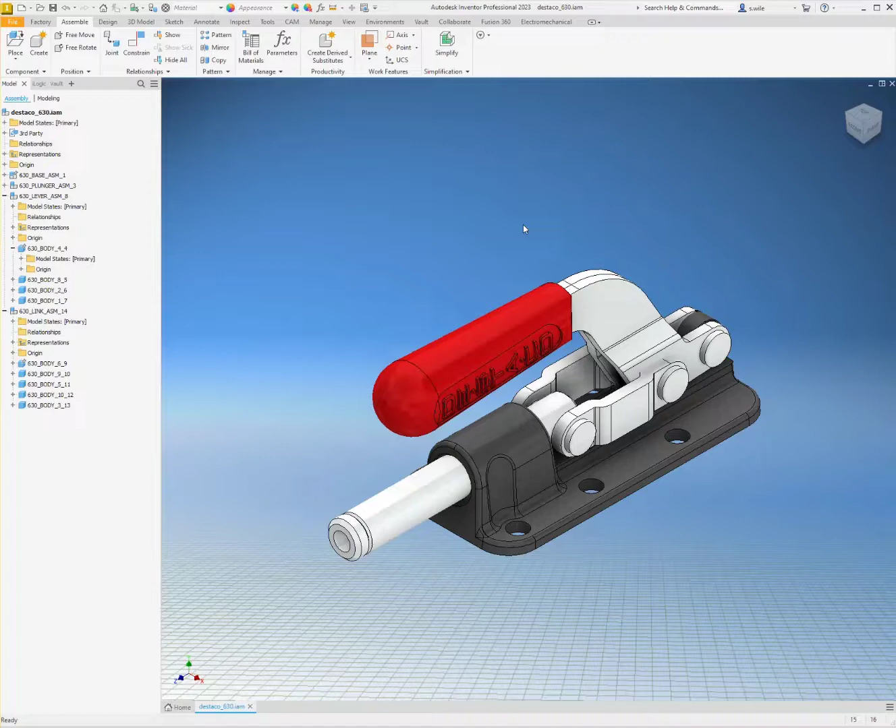So in the last video we made all of these parts, and I see now that I missed a few fillets. I think I missed this fillet running around the outside. This is the downloaded file. Nothing is constrained, it's just a step file, and I broke this apart so we could make all of the pieces. So if you've got all of them modeled, let's put this together.

So I'm going to start a new assembly, and then we'll just play around in the assembly environment a bit. Start by bringing in the base. Here we go. There's our base, and I'm going to place it grounded at origin. So right click, ground at origin. Your first part you always want to ground, and the first part should be something that's going to be fairly stable.

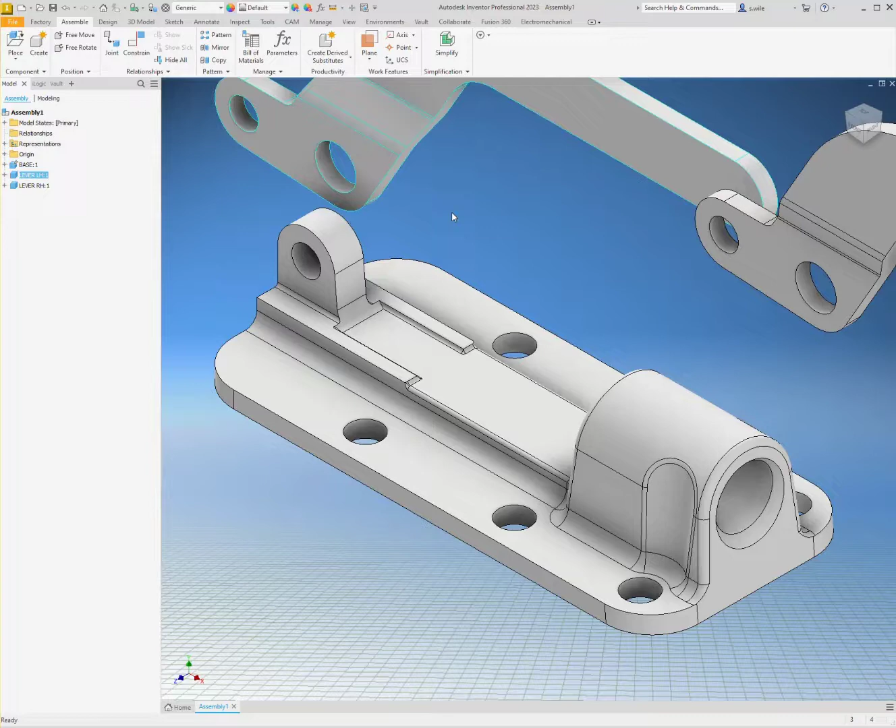So then let's go back and get the two levers and put them in position. So these will just be insert constraints. I'm going to do this all with constraints. Probably wouldn't be a bad design to do over and do with joints. All right, so they move independent of each other. So maybe a flush across the top. I think I'm going to leave that for now.

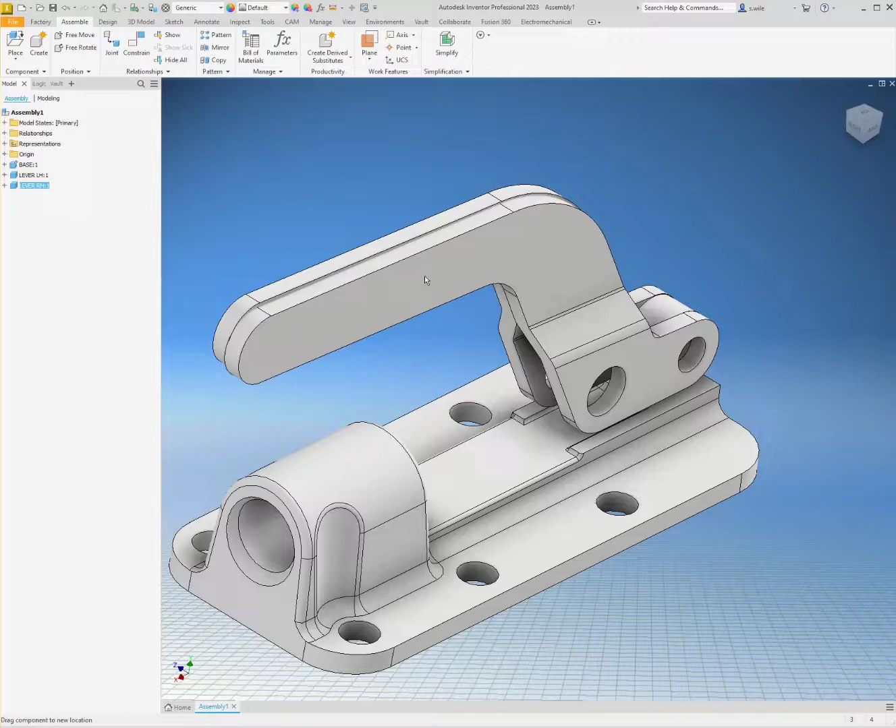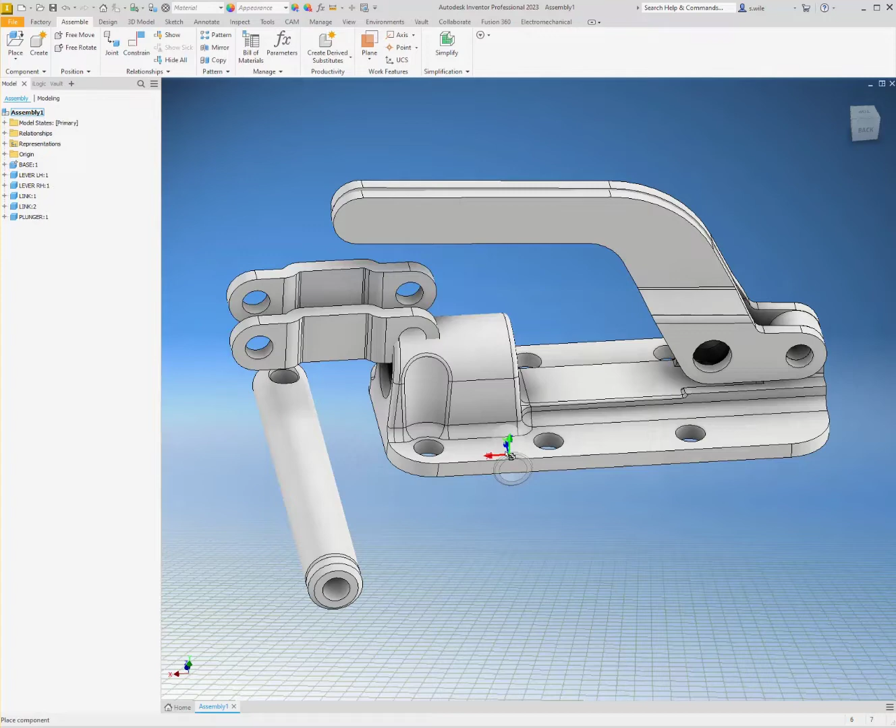And then we'll bring the links in. So we need two links and a plunger. And we'll just get this thing working. So I'll do an insert off of here to here. Oh, the bushing needs to go in there. So let's get that first. Yeah, we'll put that in first. That looks right.

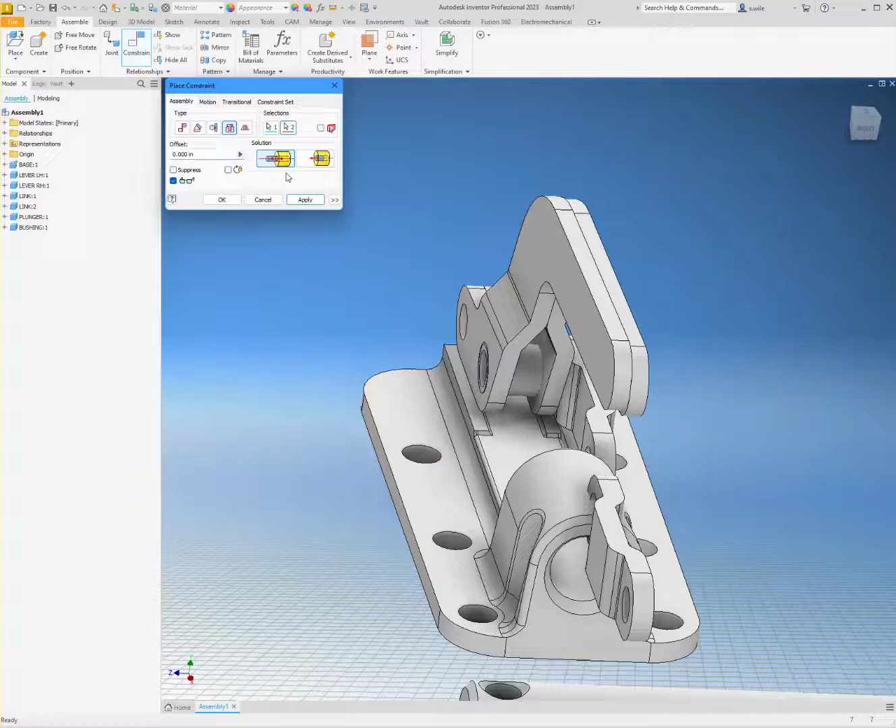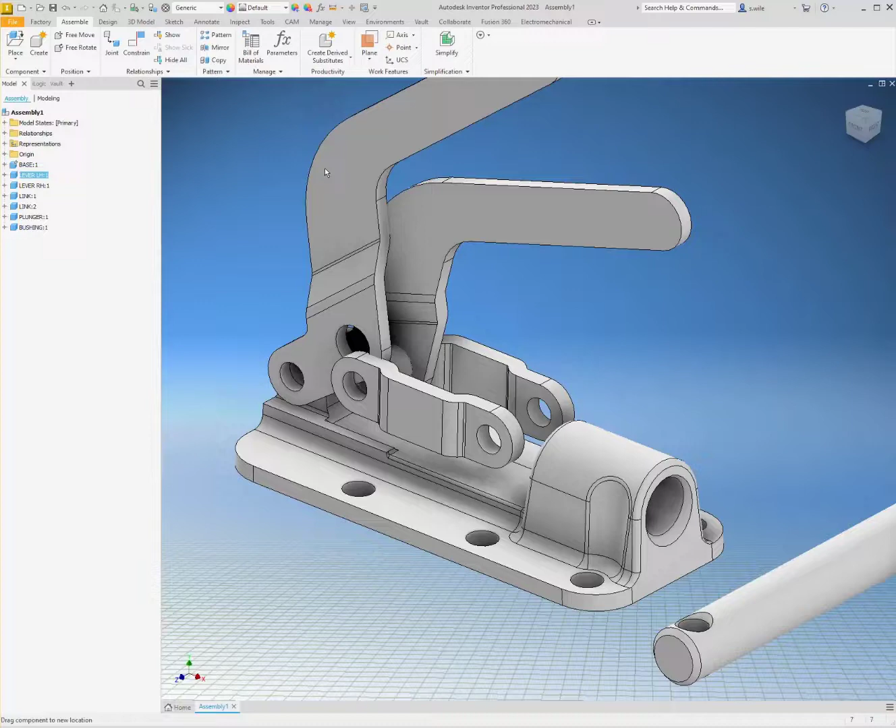And then we'll put a link on there and a link over there. All right, and I like to every now and then jump out, kind of test it. Oh, that's constrained to that bushing, so we'll just constrain this the way it would be assembled for real. Like that bushing would hold the two together.

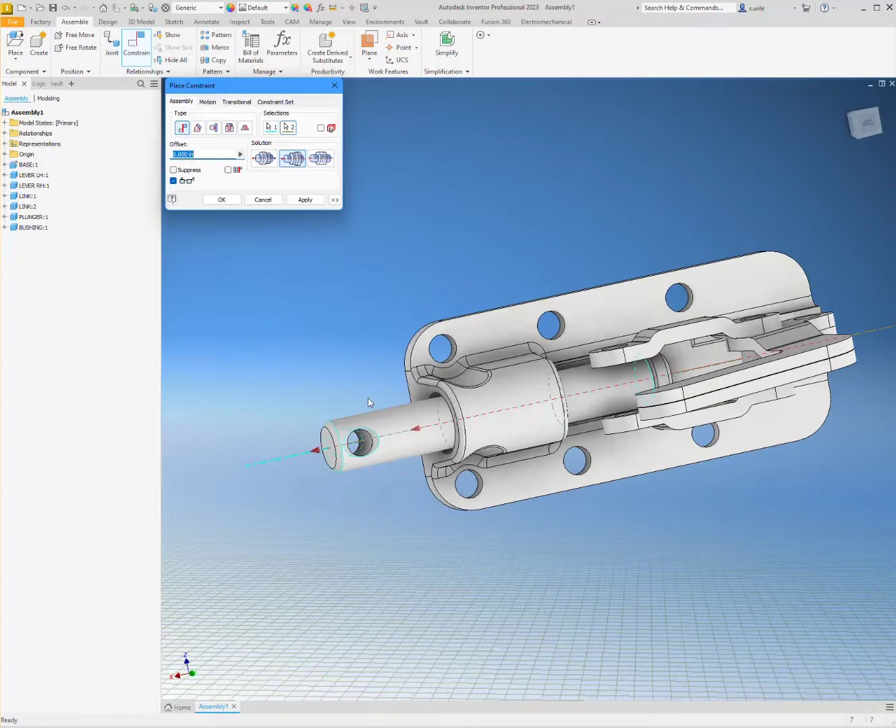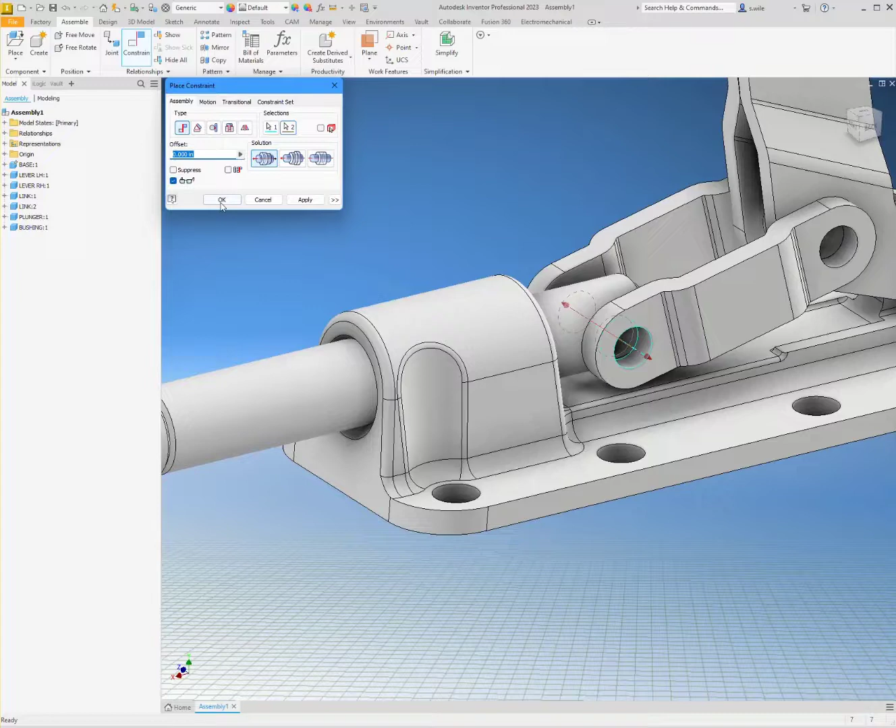The plunger, I'll do a mate, axis to axis, and that's going the wrong way. And then we'll constrain one more axis to axis. Okay, let's test it. Okay, so we'll get the last link. All right, we need our rivets yet. And I'm just now seeing that there's different sizes of rivets, and I didn't have us draw different sizes. So we might have to make a new rivet.

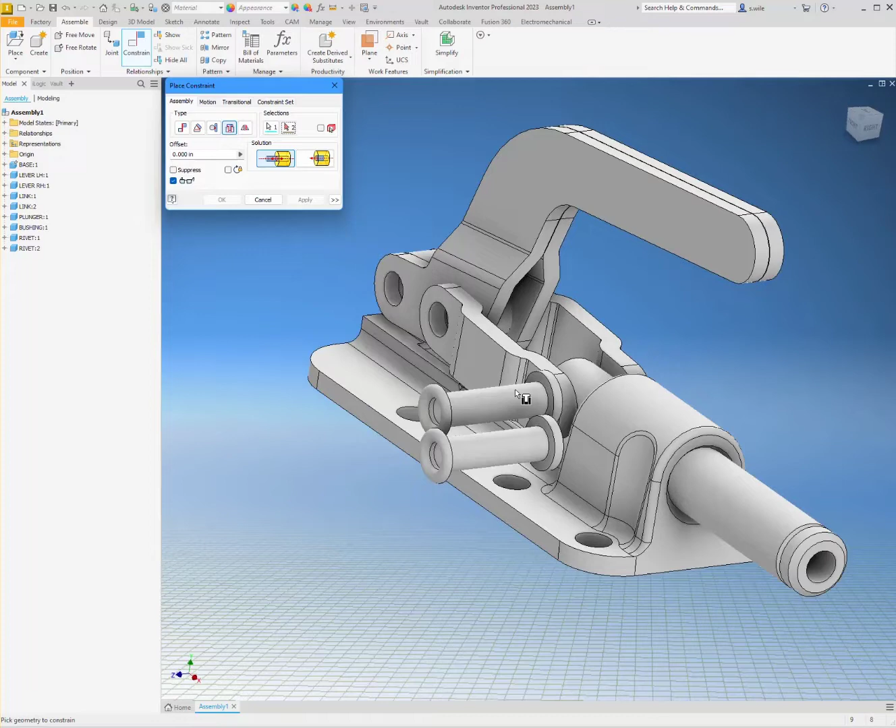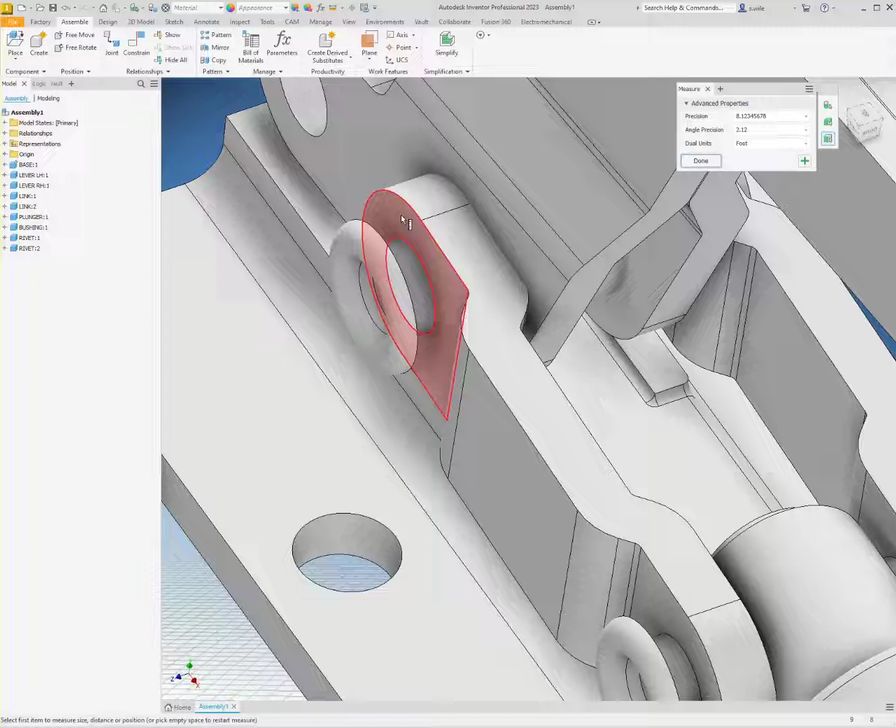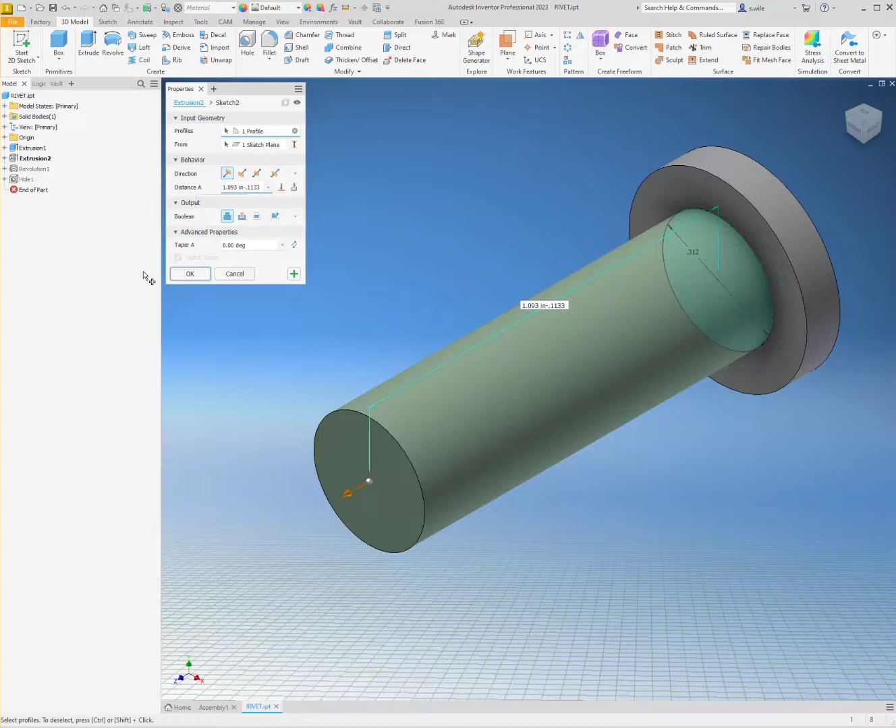Yeah, these are too big. So I'm going to measure this. We're going to fix this right now. So that is 0.1133. We want to take off 0.1133. I'm going to open this, change this extrusion minus 0.1133. Right? So those rivets look okay, but now if I copy and paste this one is not going to be right again because this is a different width and I don't have a second rivet.

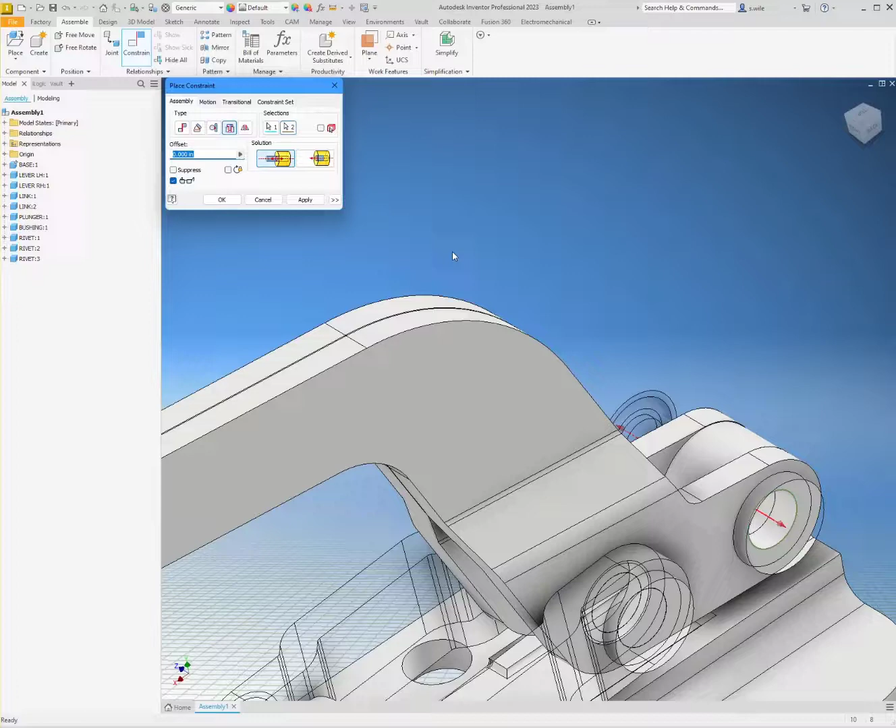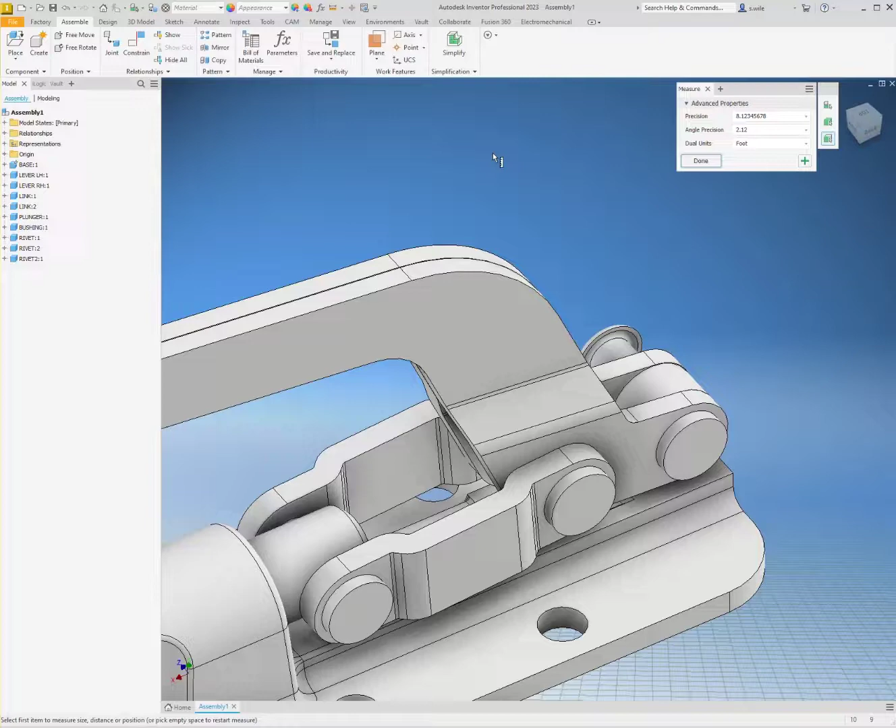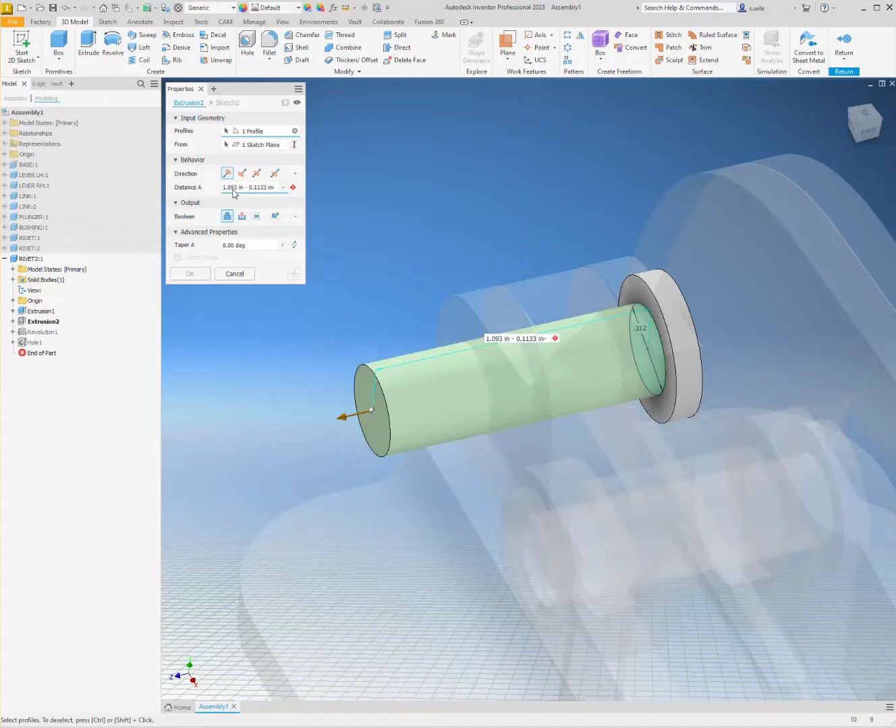So I'm going to select this part and say save and replace right here. So that's going to save it as a new name and then do a replace component. This would be rivet 2. And let's see how much we need to take off of it. Point 3557. So we're going to subtract an additional 0.3557. Okay, so we've got our 3 rivets. And let's save this, and our new rivet.

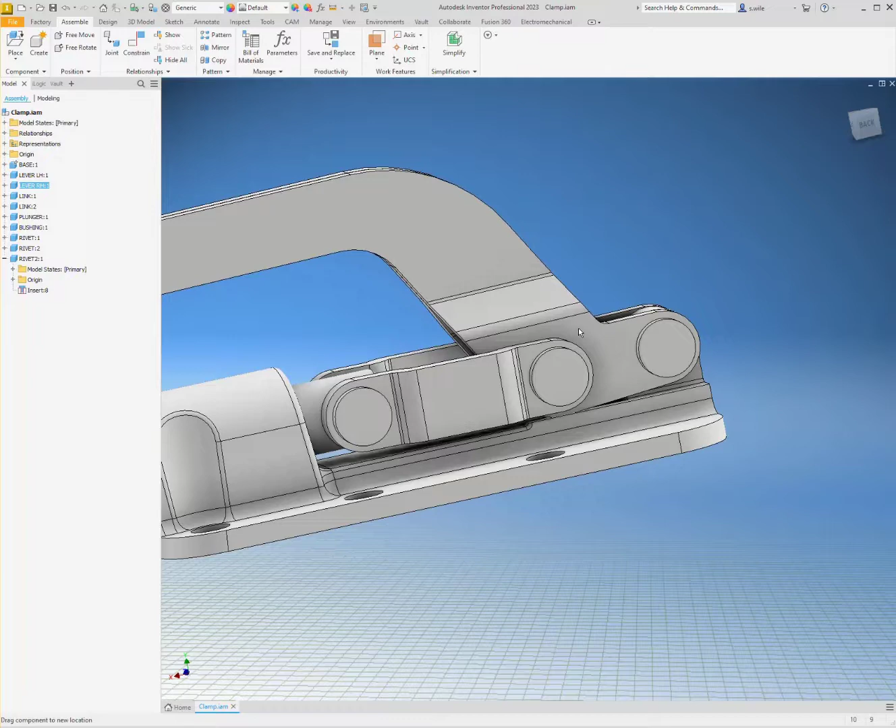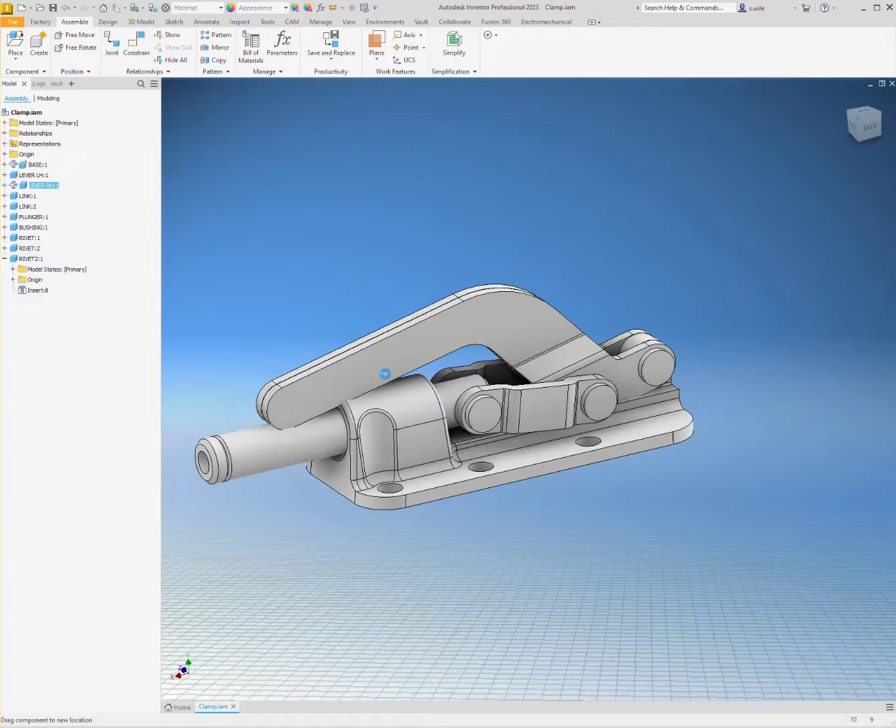So what can we do with this thing? Right now it kind of just goes through itself, and in reality it would hit here somewhere, and then when it goes over center it would hit there. So to find out what that range of motion is, we can say this piece and this piece. I'll shift and select those 2 pieces and say they are part of a contact set. And when they hit, I don't want them to go through each other. And on the Inspect tab, I can turn on the contact solver. And now that will stop when that arm hits. So it's stopping as soon as the arm hits and stopping as soon as the arm hits here.

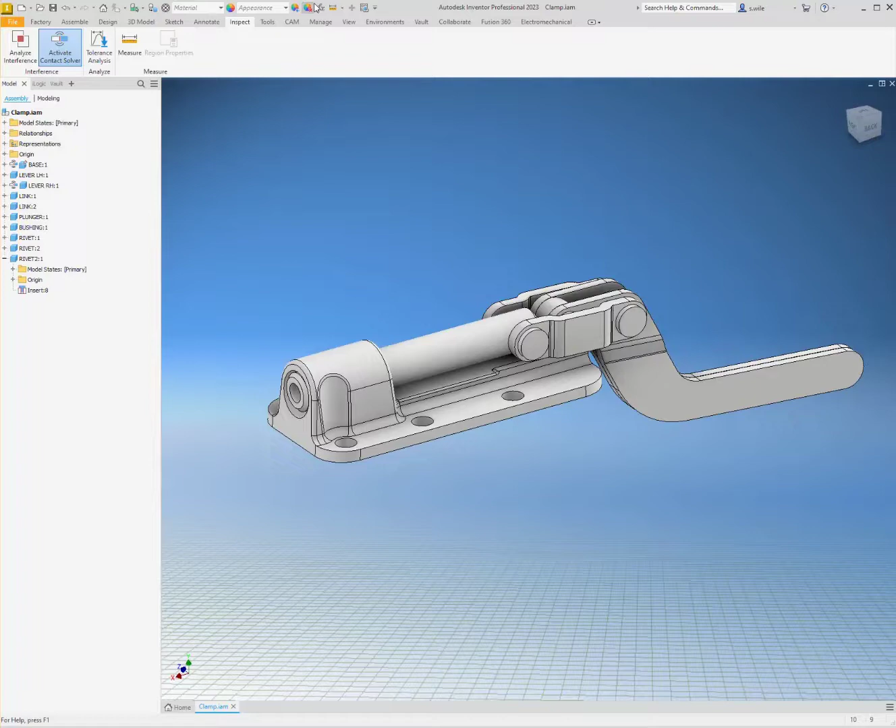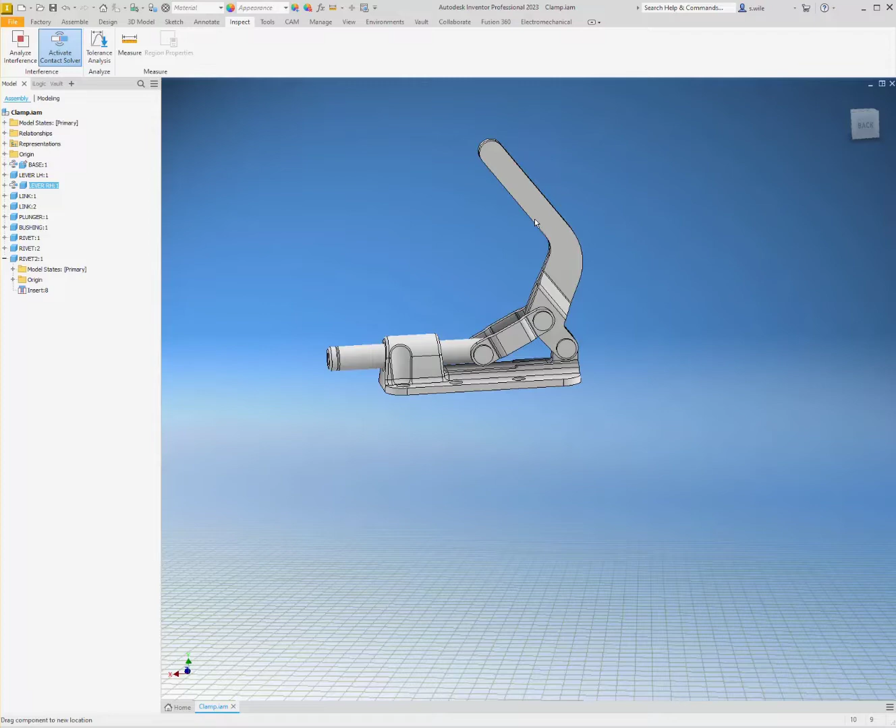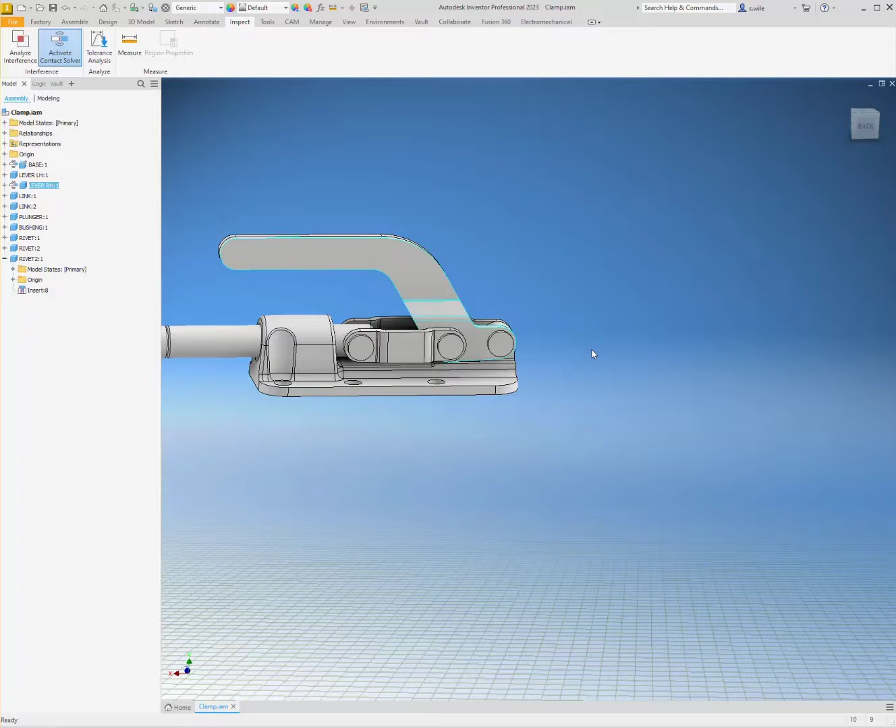Where is it actually hitting? It's hitting some, oh, you know what? It's hitting the fillet. So it's stopping as soon as it hits that fillet. So we've got our range of motion. We can measure this now. Measure from here to here. So we'll say 5 degrees, 4 degrees over 180. And if I bring this back around, when it goes over center there, we have 0.34 degrees. So just by turning on contact solver, you can very quickly find what our range of motion is. And if I turn that back off, now this will go through itself again.

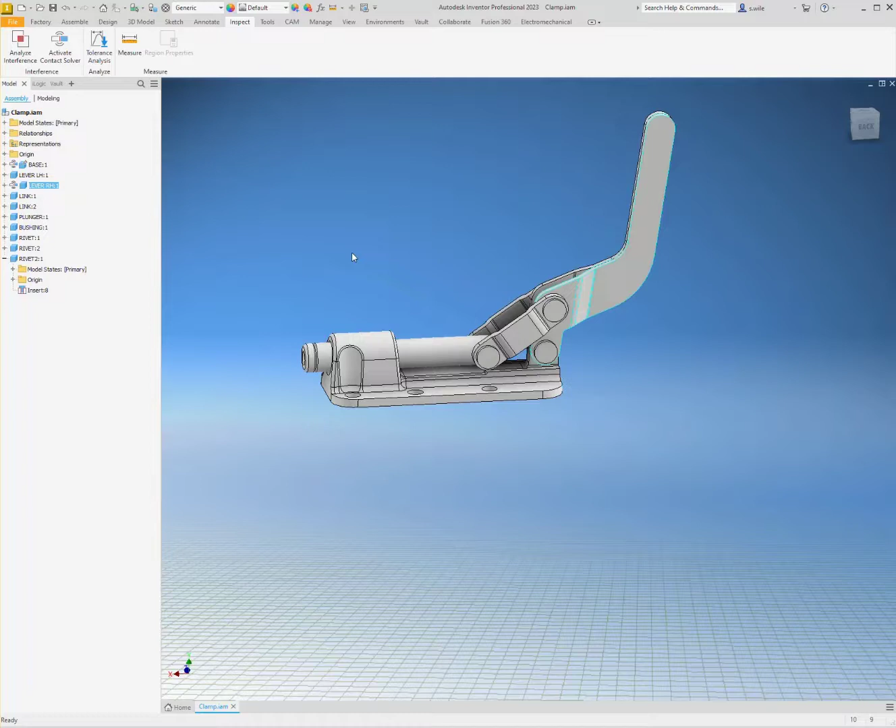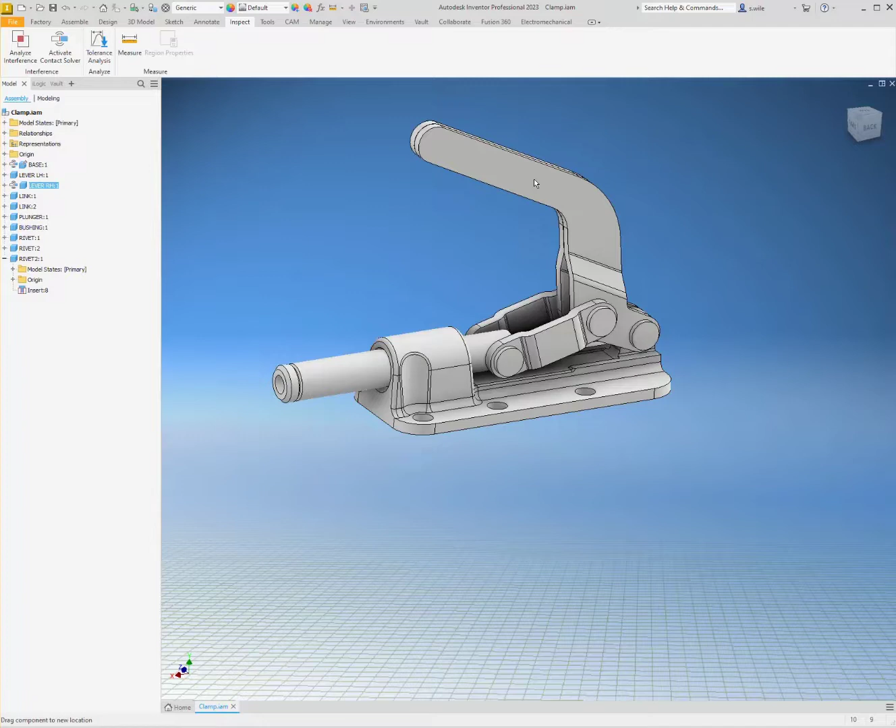But I can add my final constraint. Like this is something that would go in a library, and you can't leave stuff just flexible like this because you may want it this way and the next user may want it like this. And then your models are going to change, and then you'll open your model and change it back. It's going to change the other user's model. You also cannot have this assembly in another assembly in 2 different variations. So if on a table I want this closed and then opened, I'd have to save it as a new assembly if I didn't fully constrain this.

So I'm going to add an angle constraint. And I'll pick this as my reference vector. And I can go down 0.34.

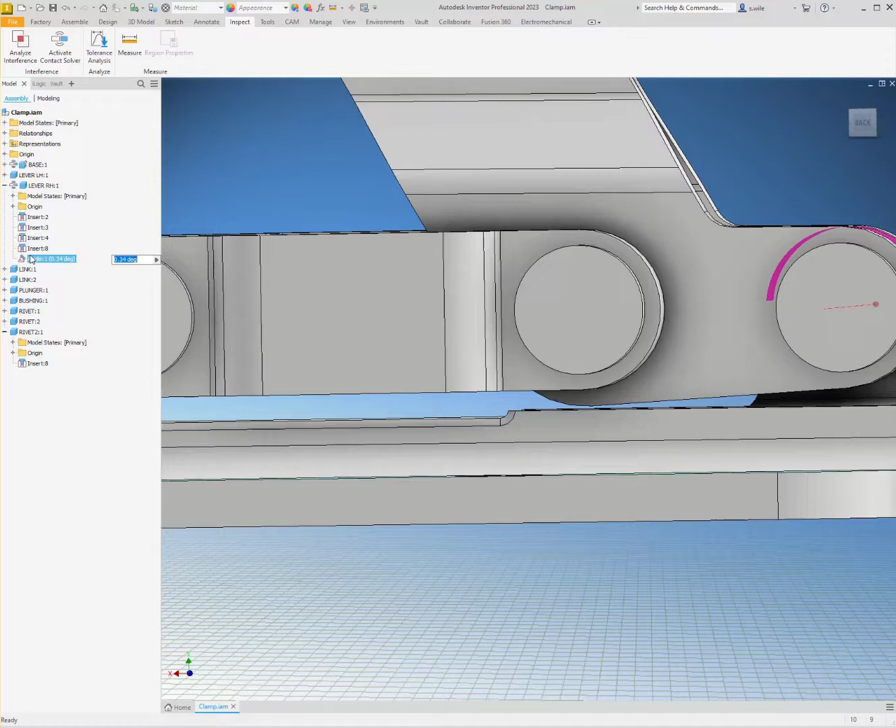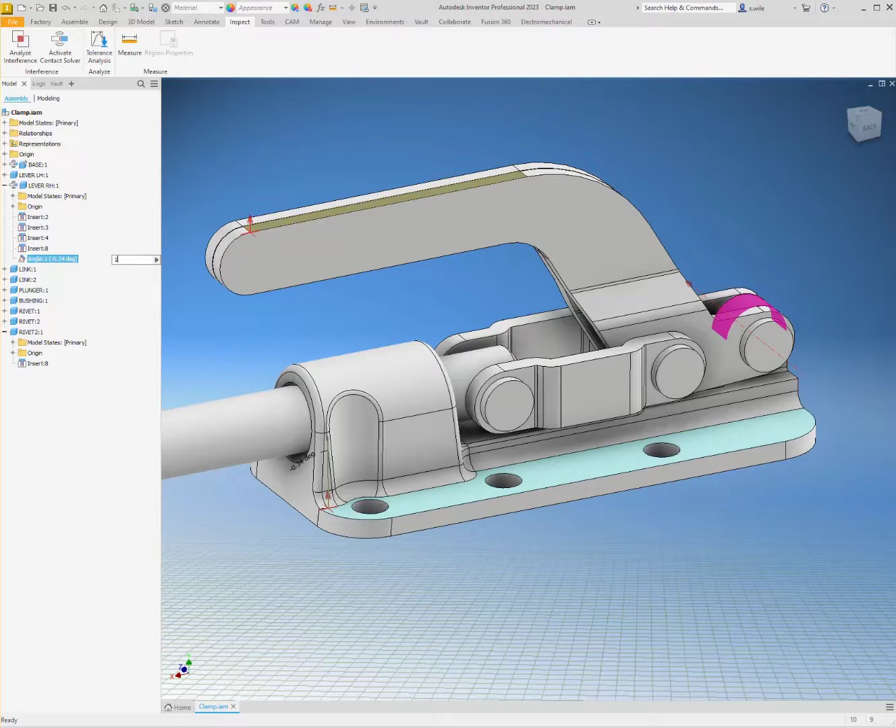Negative 0.34. There we go, negative 0.34. So now I'm just over center and it's locked in place. But then I can move this back. So let me write this down. Negative 0.34 is closed. And I can make this 184. And that's where it's hitting on the back side. So that would be fully open.

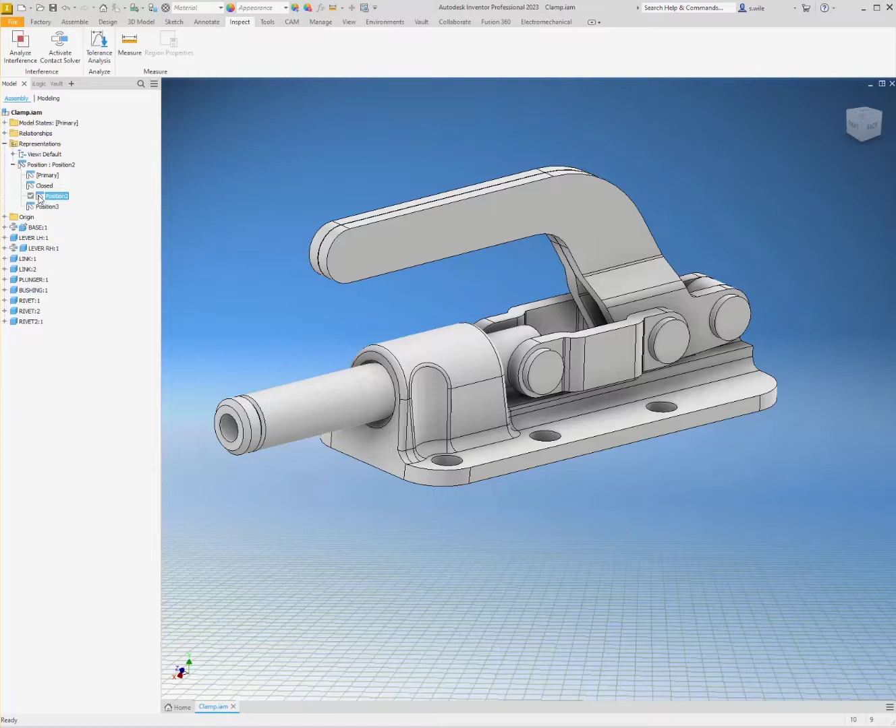So how do we make it so that we can switch this between negative 0.34 and 184 without having to edit a constraint? We do that with positional representations. So I'll make a new positional rep, make a couple new ones, and this one will be called closed. We'll call this one half, and this one open, and we'll make one more and call it free.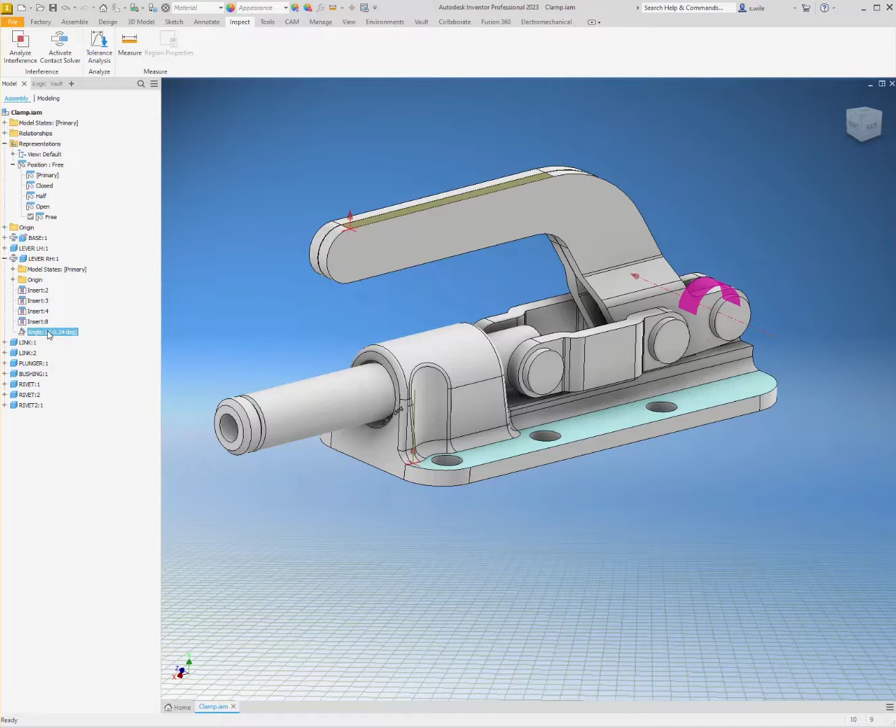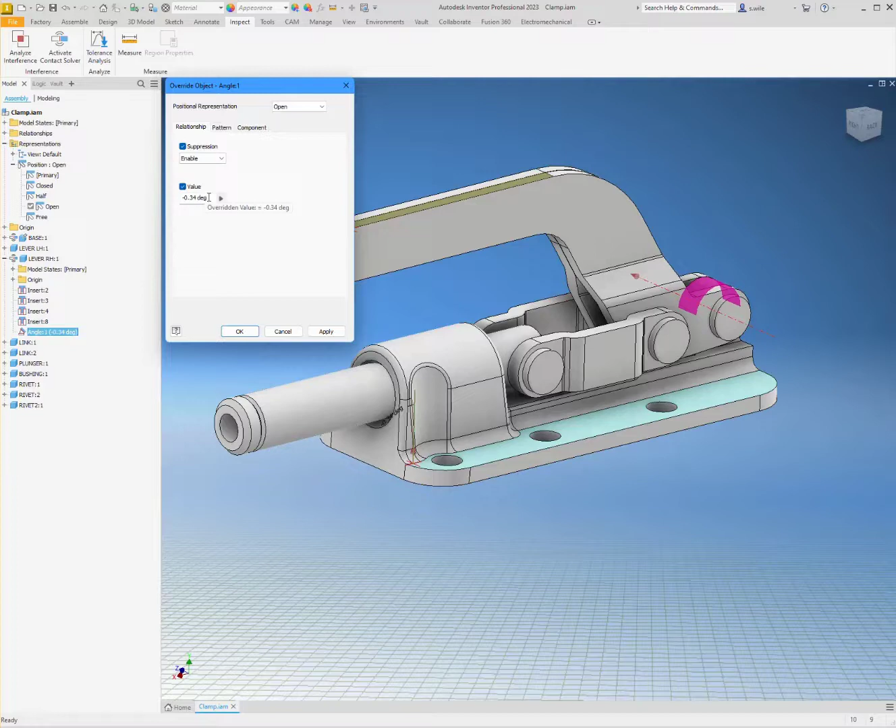So with the check mark on free, I'm in that positional rep. I'm going to do an override on the angle constraint and say it is suppressed. So as long as it's in free, this thing's free to rotate. If I go to open, I can override this. I can do it all from here as well. When I'm in open, I never want it suppressed. If someone goes in the primary and suppresses it, and I'm using open, I don't want it suppressed. So I'm going to check both of these. And this is going to be 184.

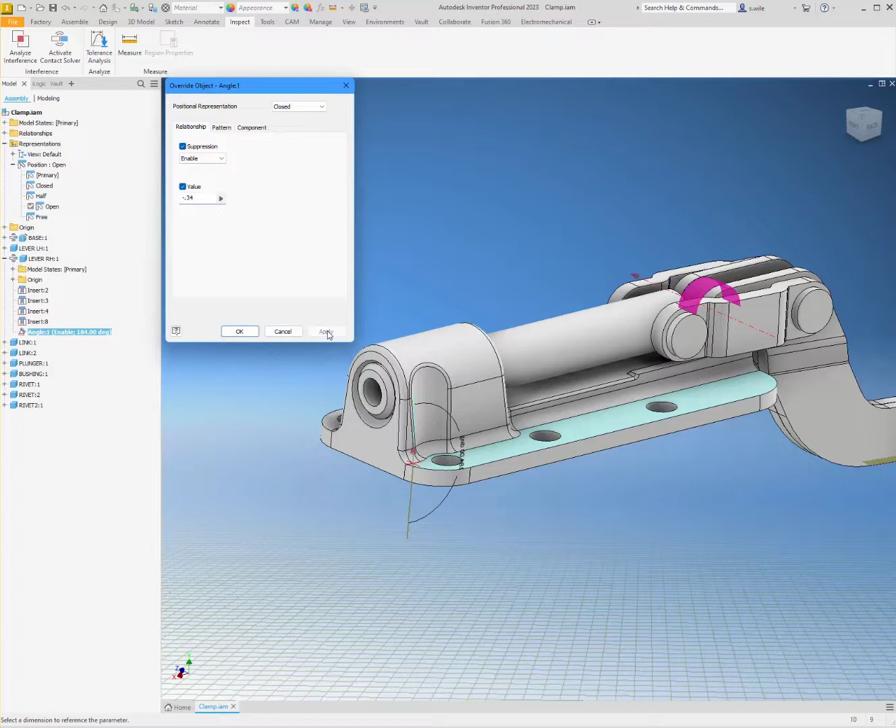And then half, oh, I was going to show when I'm overriding this, I don't have to switch. I can switch here. So I can go to half and say half is 90, apply that, and then I'll go to closed and check both of these. And this was negative 0.34 and apply that. And now I've added an override to closed, half, open, and free. All right, so let's save this and see what we can do with these.

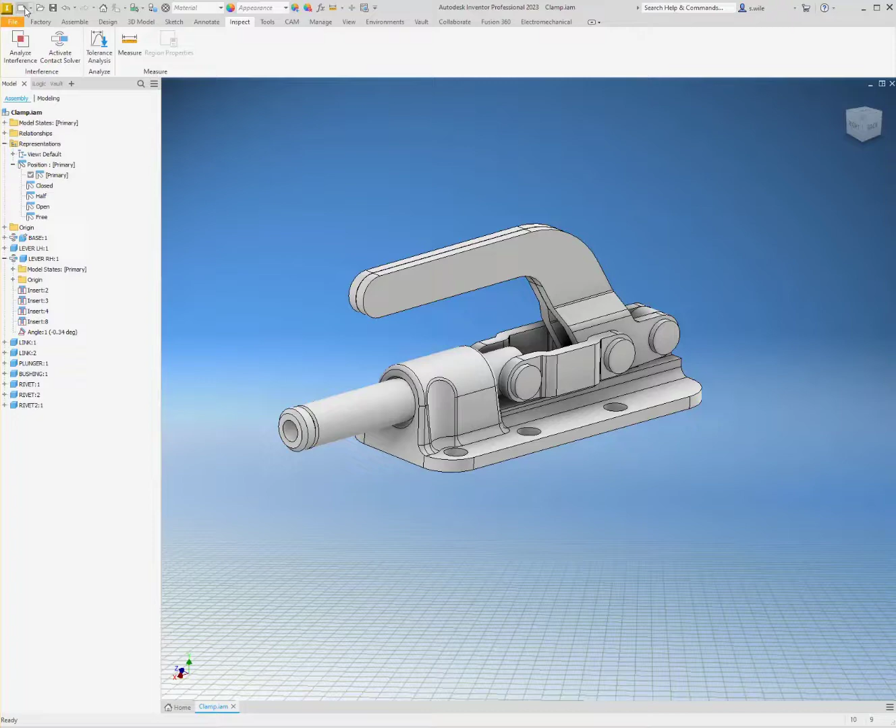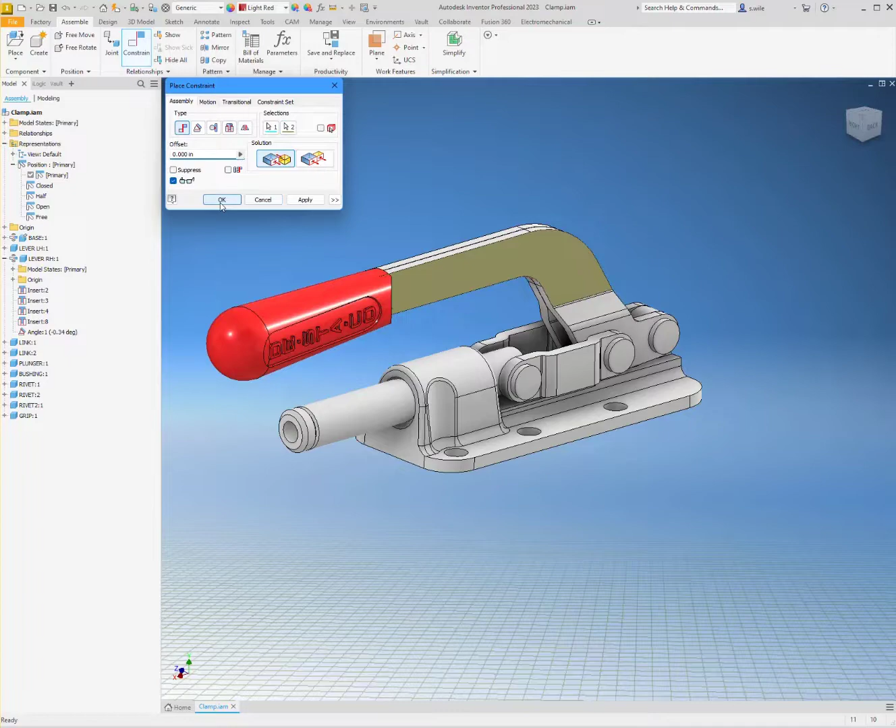Oh, you know what? I didn't add the handle or the rubber grip. The most difficult thing to place. Let's go place that. Grip. This one's difficult because it's a stretch fit. So first of all, we want it right in the center. And if I put this face on here, you can see it's not centered. I'm digging into material here, and I'm flush down here. So actually it's at an angle because that end is flared out a little bit.

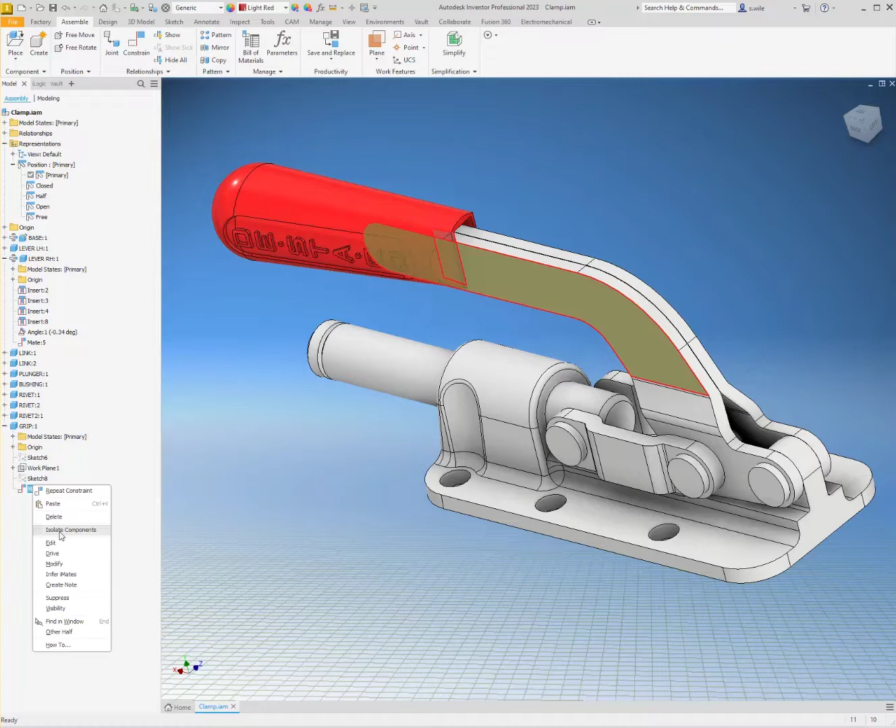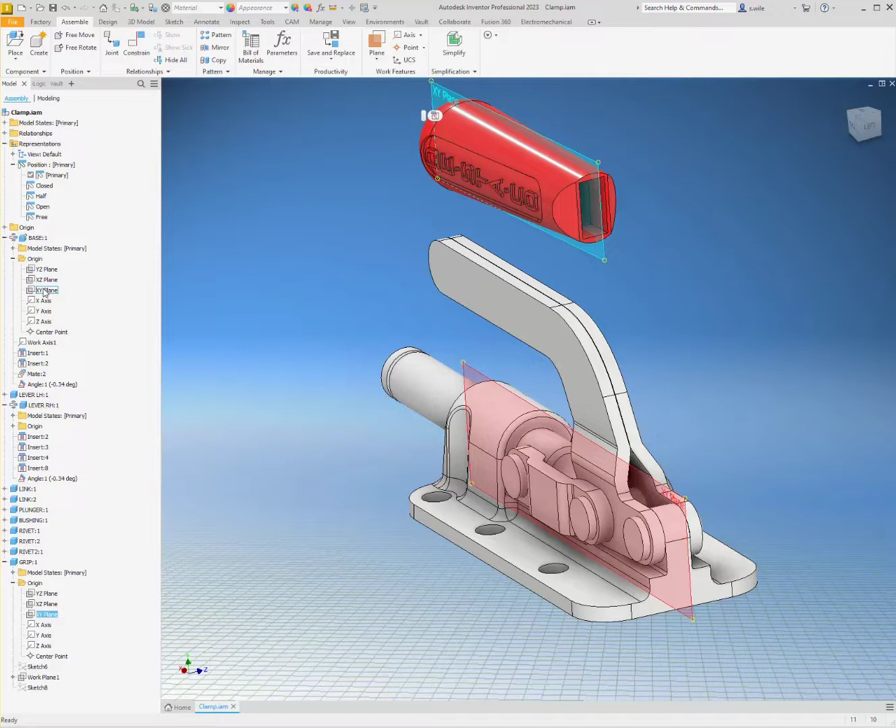So to do this right, I have to use planes. So I'm going to find the origin plane that runs down the center. This is why it's important to model around something that makes sense plane-wise. And go to my base and find a plane that's going to work there. So it's going to be XY, so I'll say constrain XY to XY and say OK. And now this should be perfectly centered, same amount of material squished around the metal piece on both sides.

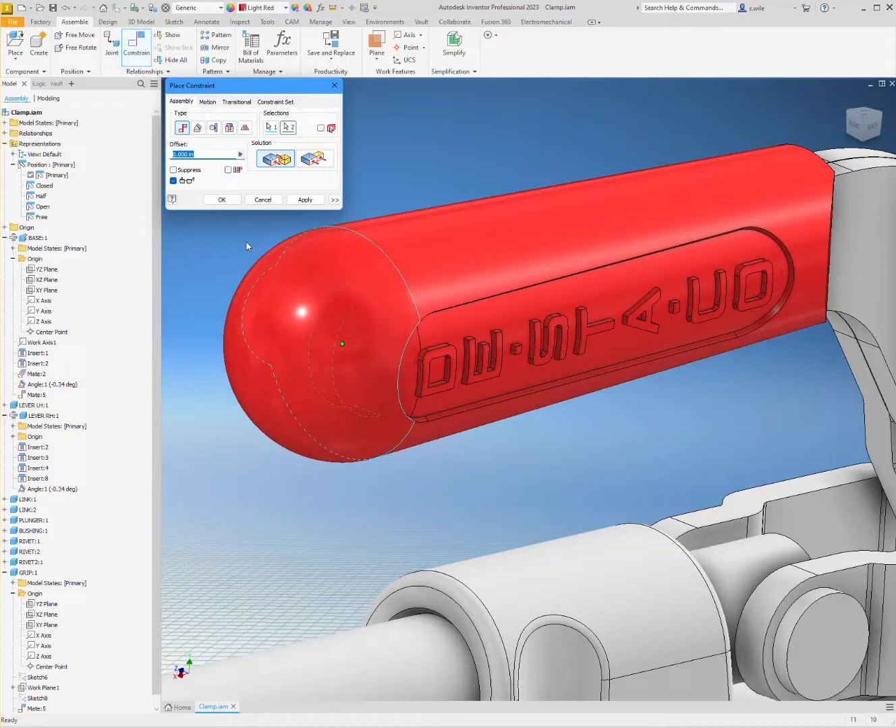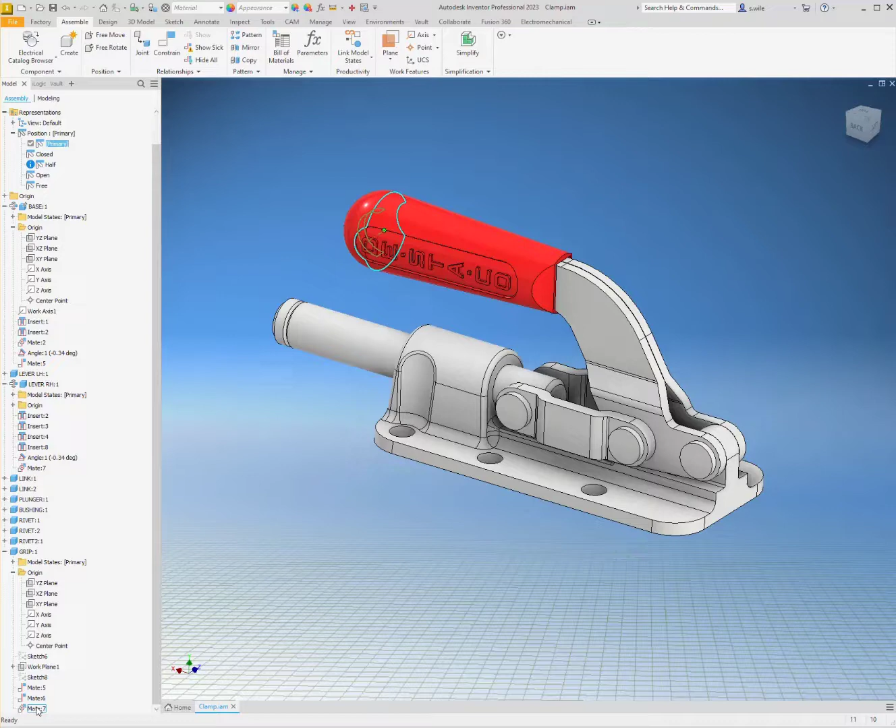Let's see if we can do a constraint from face to face with a mate there. So where are we at here? And then I don't know that we can do, can we just go on that edge and that axis? Okay. So that's fully constrained. Let's make sure that we have our planes and stuff set right when we go to half. Yeah, I thought it didn't like the last mate that I added. Let me delete this one.

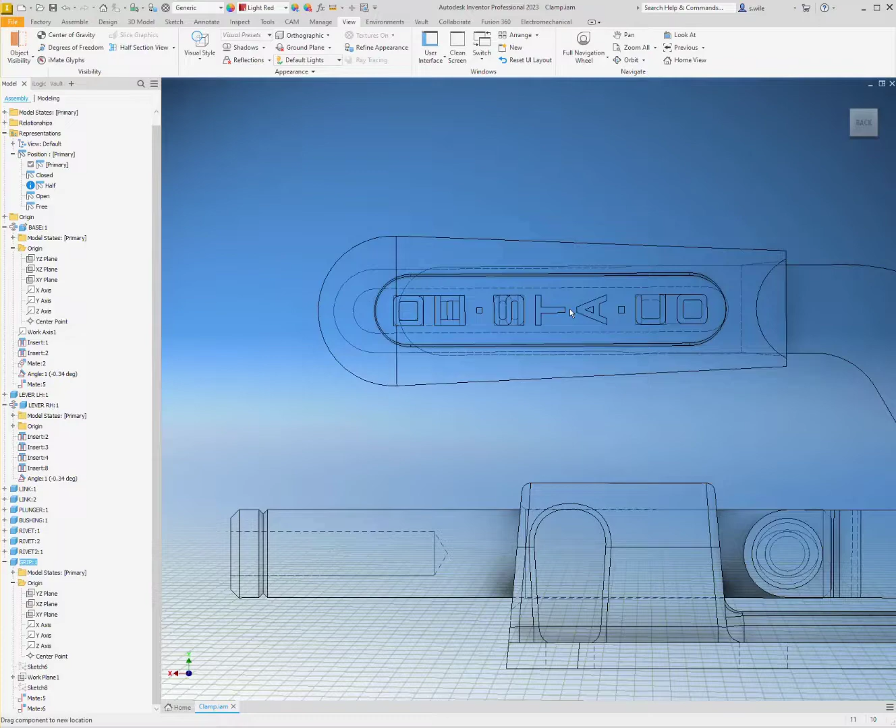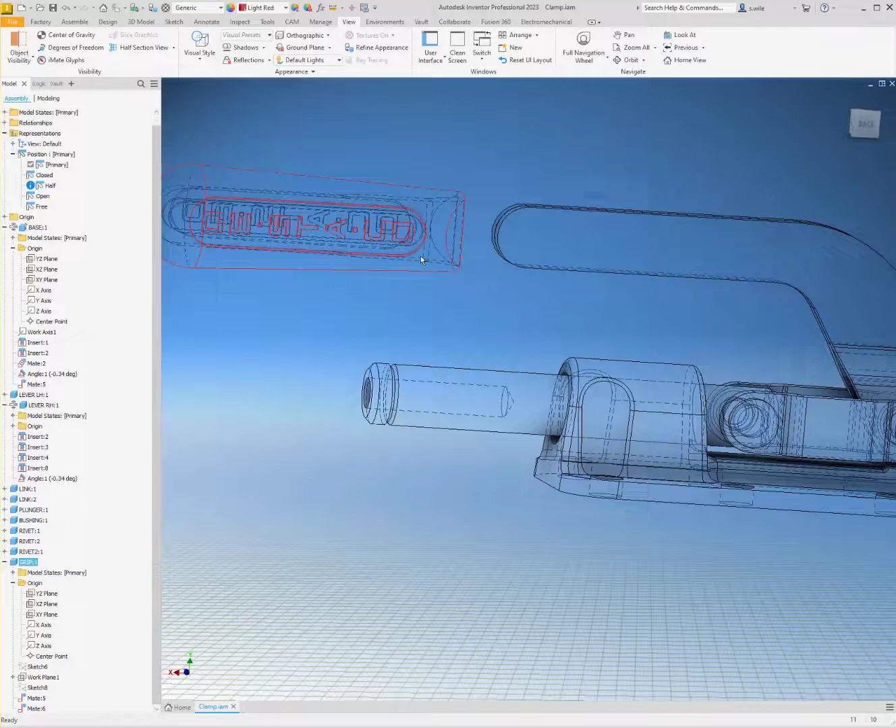Because it's a stretch fit and I said face to face, the center point of this circle is not quite in line with that axis. So to make sure that it's all the way on, I think I'm going to delete this mate. And I'm going to do a constraint center line to center line. So now it should be pushed right in against, but it can still pivot.

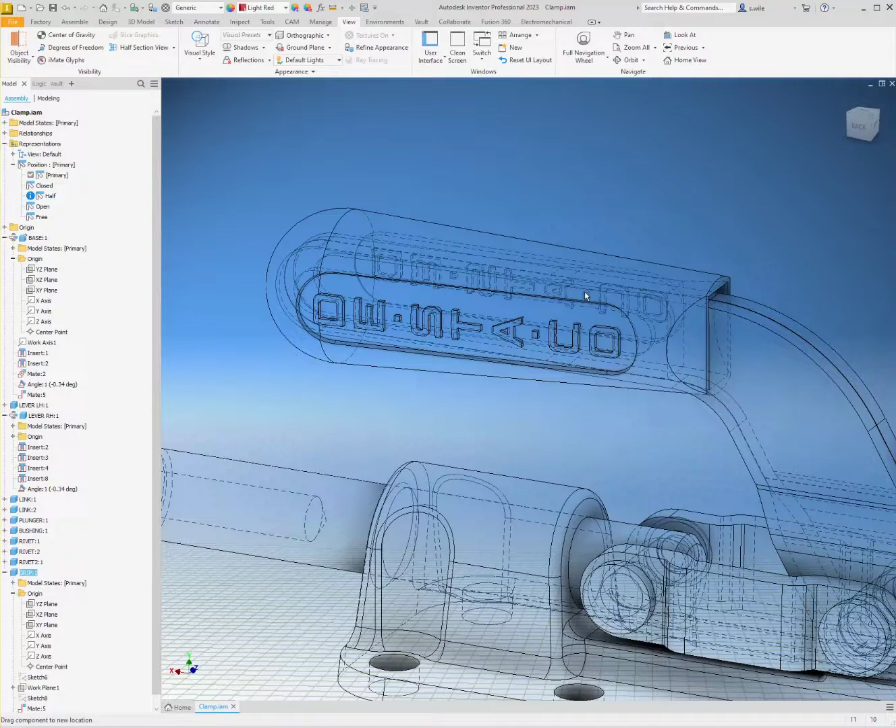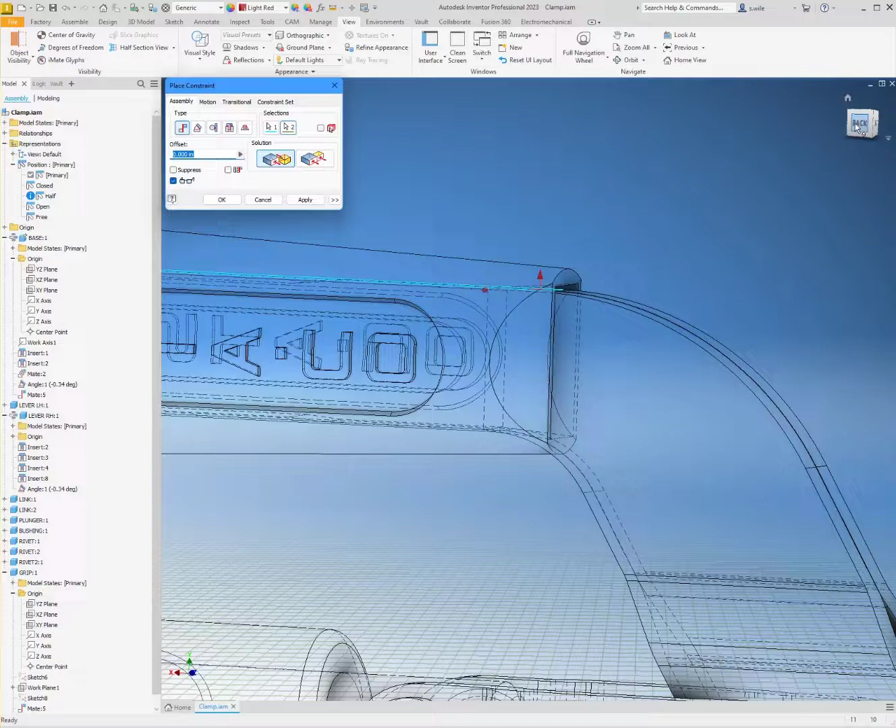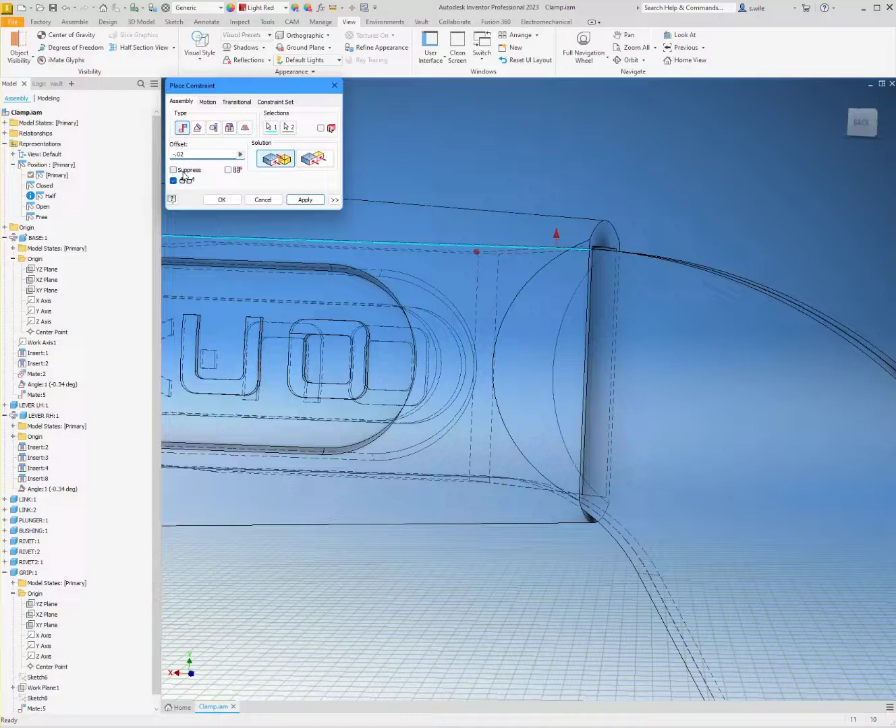And because it's a stretch fit, I think I'm going to have trouble with any face to face. So I think the best thing that I can do here is pick this face and just go with an edge and then just play with it until it looks right. So 0.01, 0.02, 5. That looks pretty good. If we go back to shaded with edges, it's still kind of tearing in more here. Again, this is a piece of rubber, so it would stretch around this.

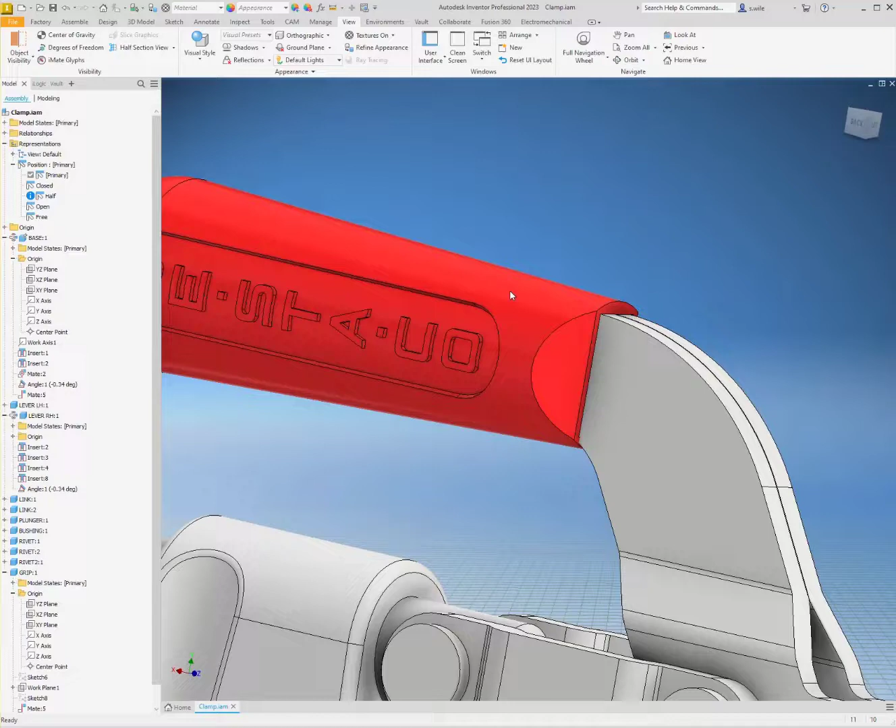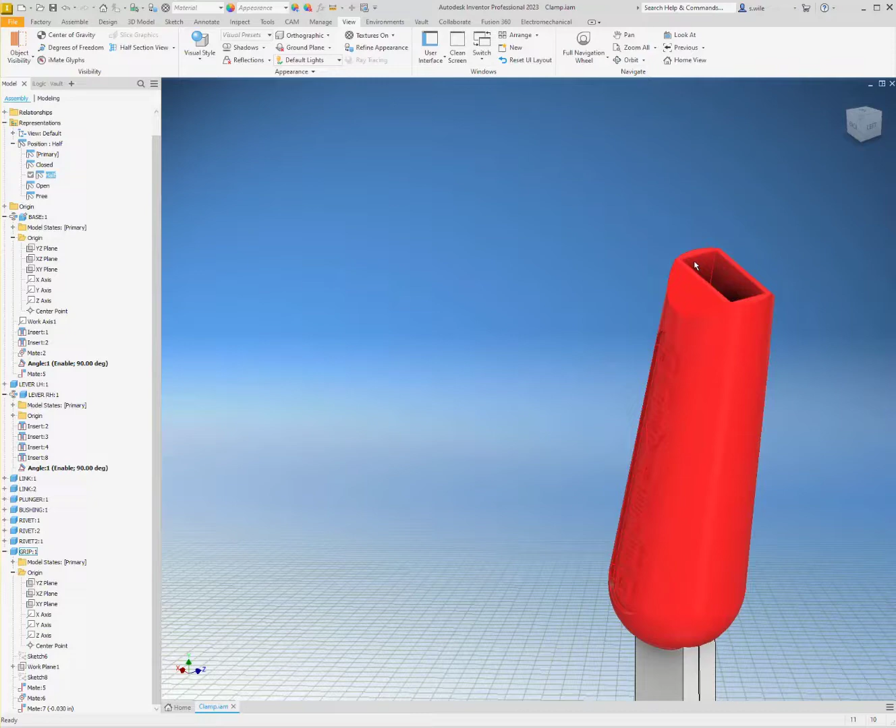Could probably take that a little bit more, 0.03. Now it's a little bit in up here and a little bit more down there, but that should be fully constrained. So there's closed, there's half, and my piece flipped around. The reason it was able to flip around is because I went from this 0 position up to the 90 position, and I said this face is aligned with this edge, and this fulfills that. So that actually is true. So we've got to come up with a better way.

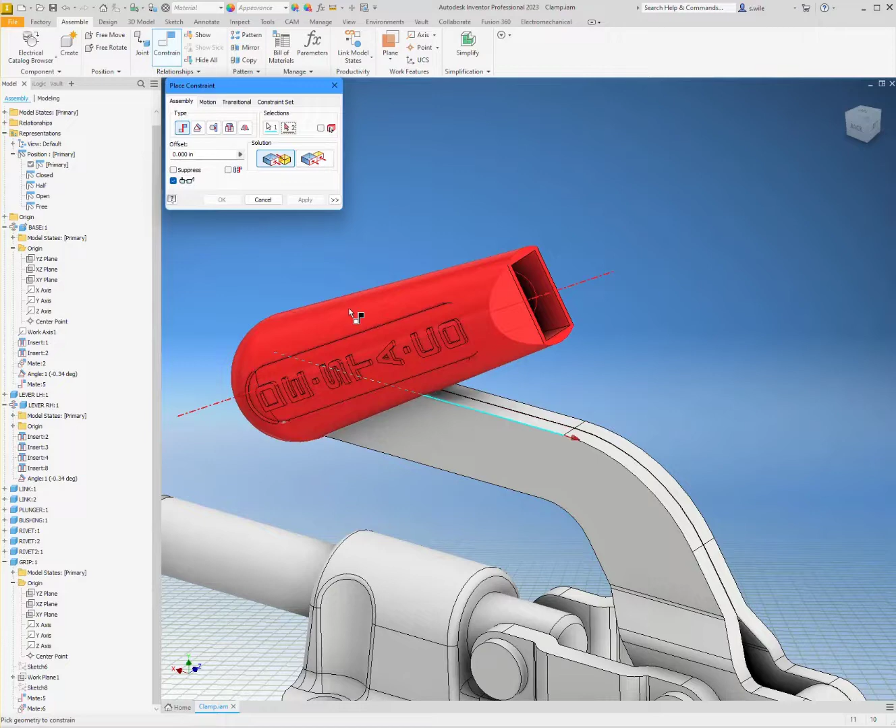So I'm going to go back to primary, and we're going to delete this 0.03. Try something different. So let's try an angle. So this edge and the barrel there, I have an axis running down the center, and I'm going to go to an angle, and for my explicit reference, I'm going to pick this edge. So why is this line not, there we go. Now the arrows are pointing the same way, so 0 would be straight down.

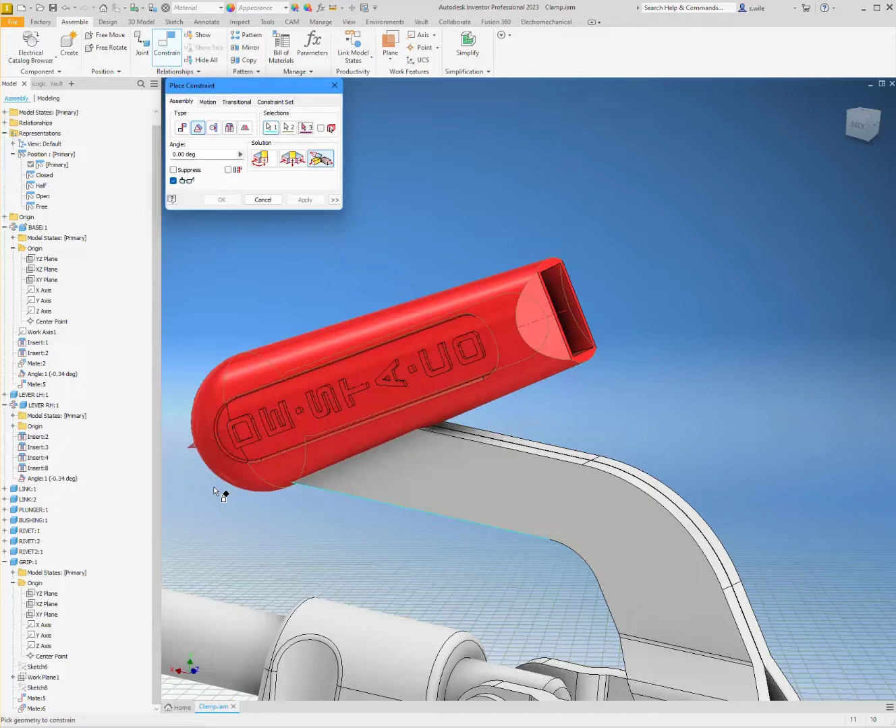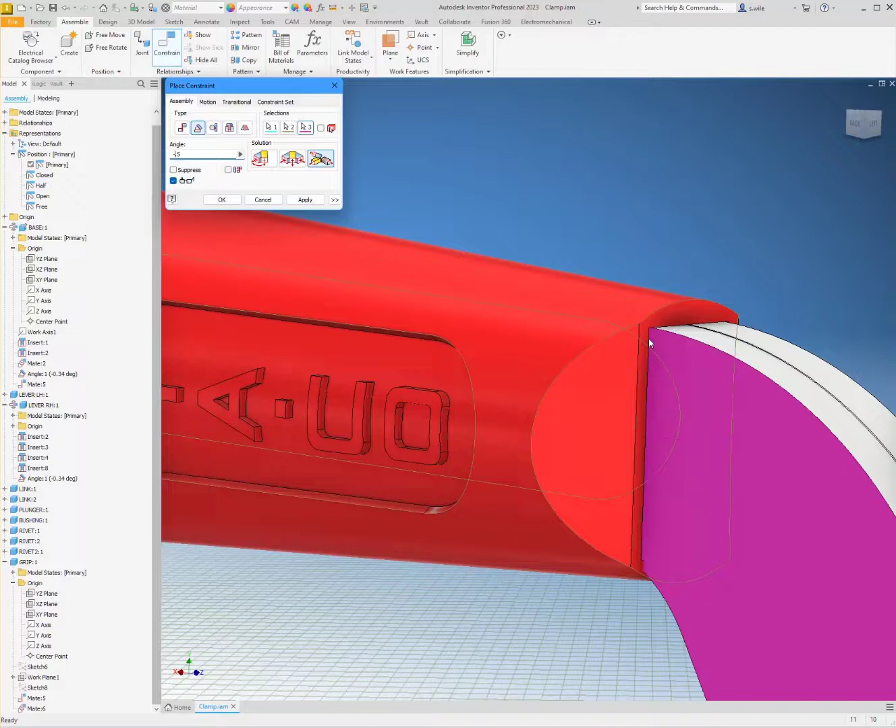My explicit reference vector, I'll just pick the side of this face. So my lines are both pointing in the same direction with 0 degrees, and then instead of doing that 0.03, I'll try negative 0.5 degrees. Actually, that's really close to what I had, but I used an angle instead of a mate. And then we'll come back and flex this and see if that keeps our rubber grip in place.

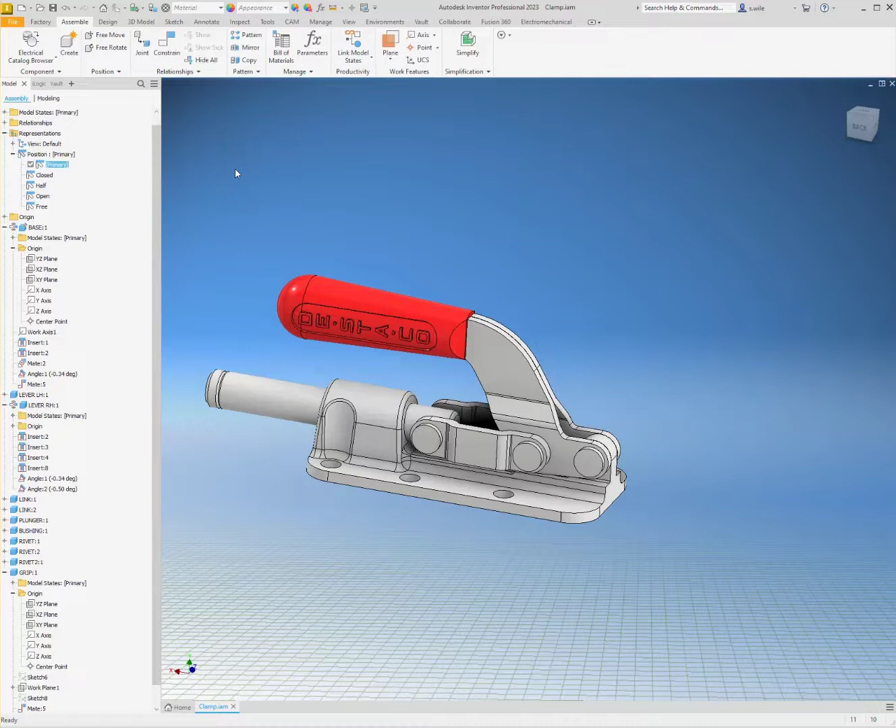All right, and then if I go to free, I can still drag this. All right, I think we're fully constrained. We have our positional reps set up. So let's put this on a tabletop, and then you can see what this looks like in another assembly and how you can use positional reps.

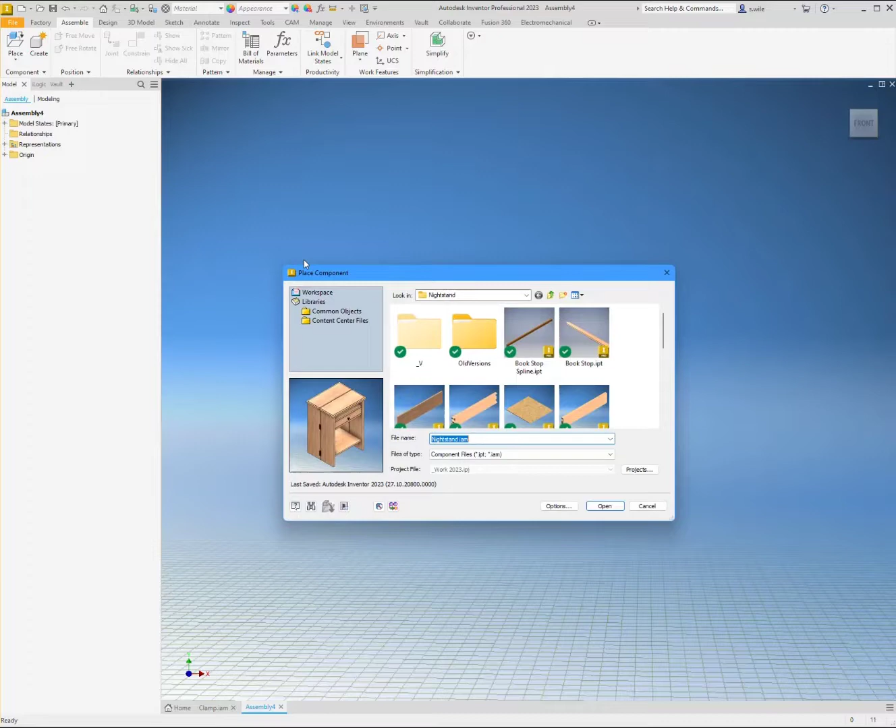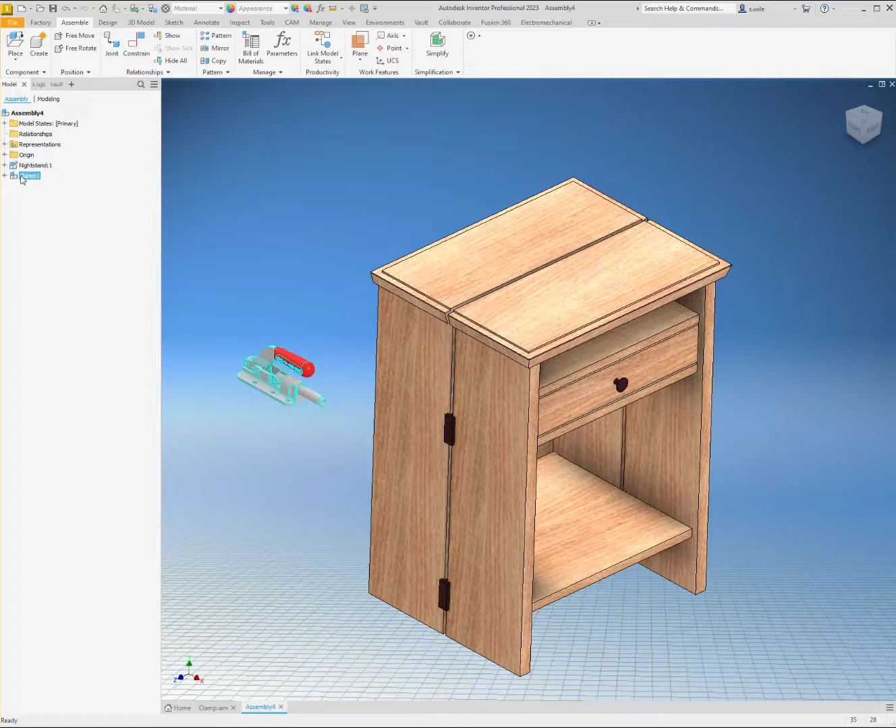So let's start a new assembly. We'll bring in some piece of furniture. This is on my drive already, so I don't have to go get something out of Vault. And we want to put some clamps on here. All right, so I can copy it here, then I don't have to browse out and get it. And then I want some more, and I'm going to put them all flush with each other because they're going to all go on top.

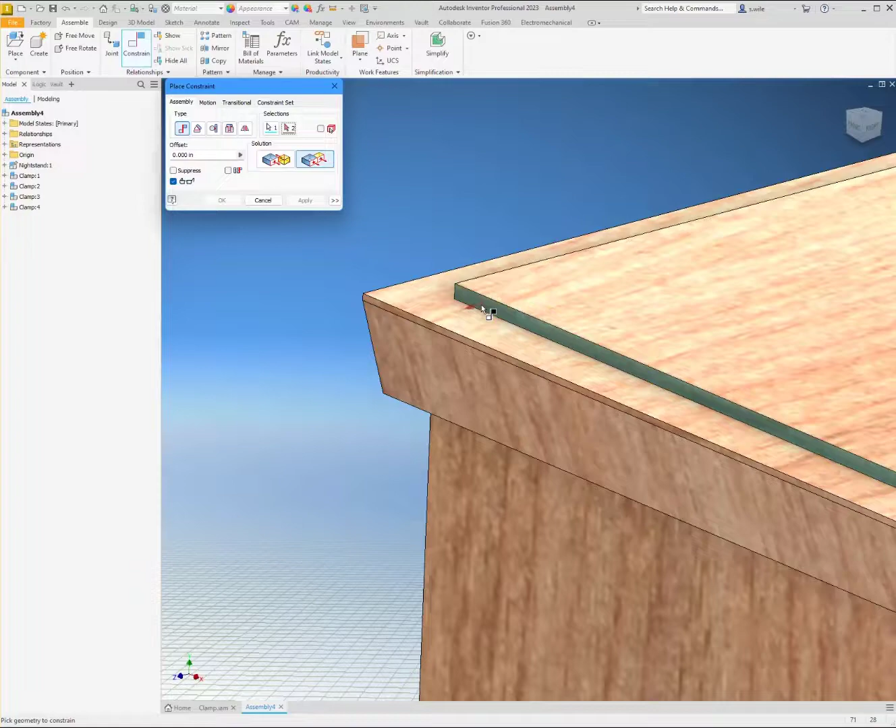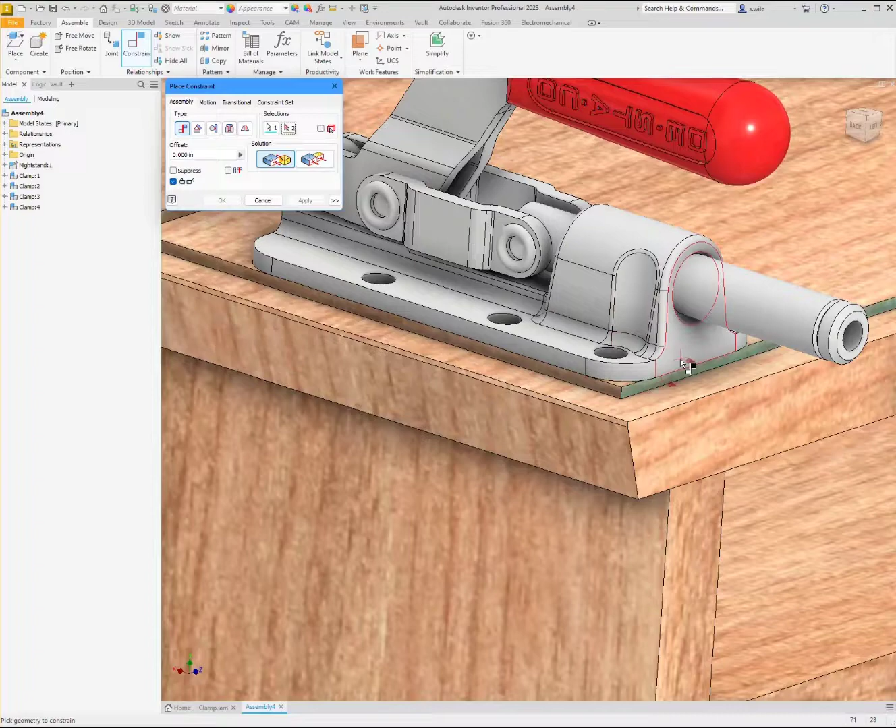And then we'll put one in each corner. So flush and mate. Oh, that's angled, so I'm going to have to go off the edge. So that one is constrained. So you're going to go over here, and we'll go with the mate. That one's constrained. And we have one more.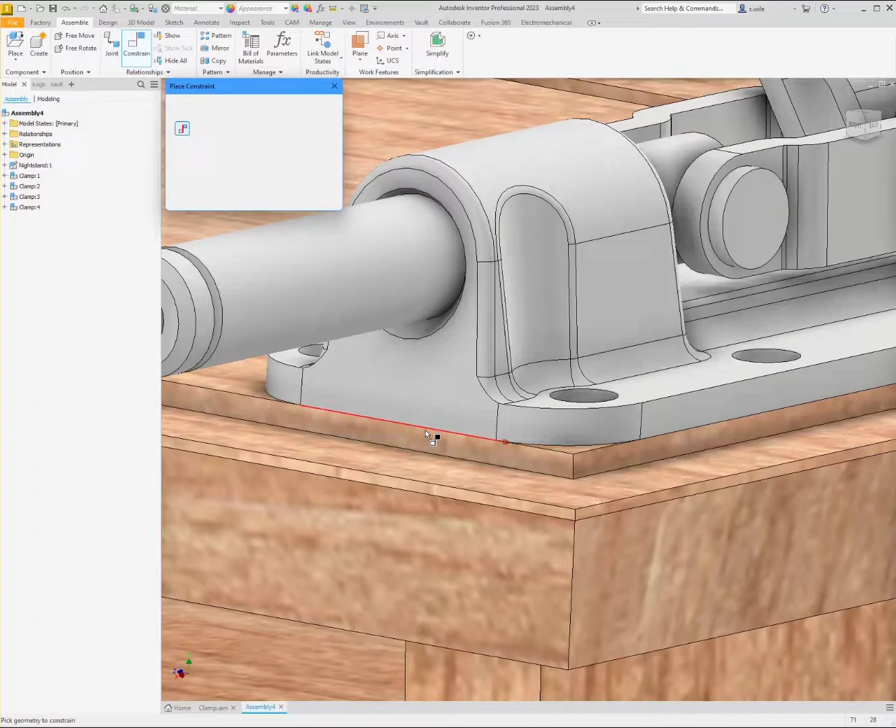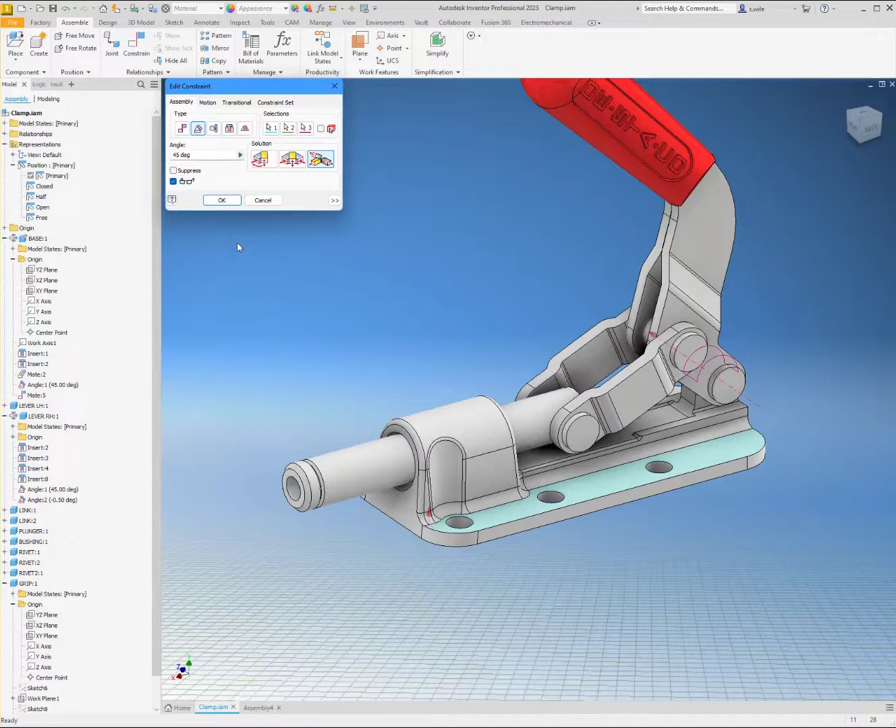Okay, so if I was to go back to this assembly and change this angle to 45, this assembly gets all of their clamps at 45. Negative 0.50. This makes a horrible library part without positional reps, because with positional reps, I can find it in the browser, go to representations, positions, and say you should be half. And now I have the same assembly in varying positions.

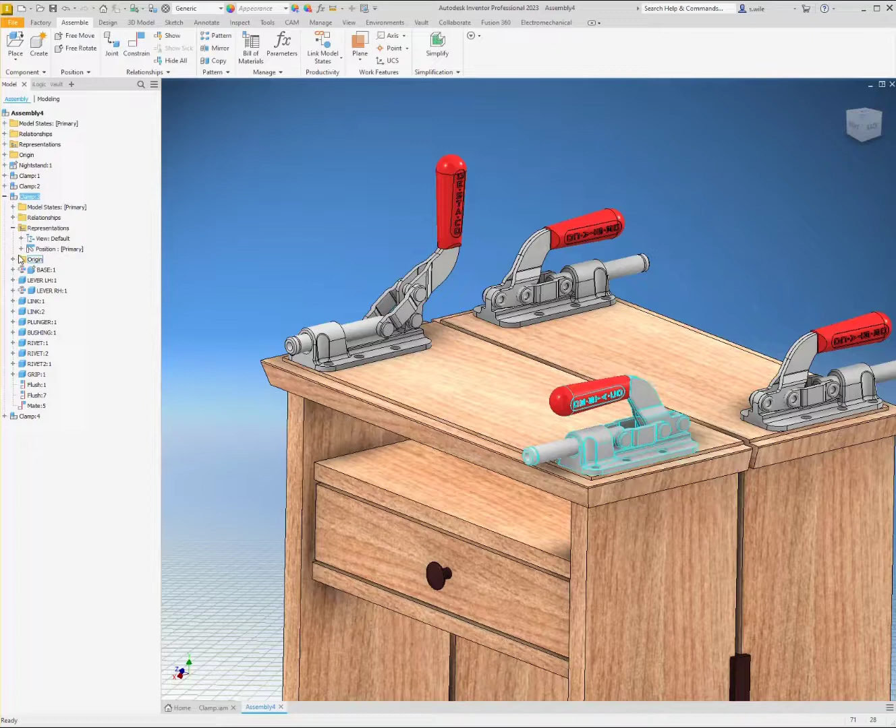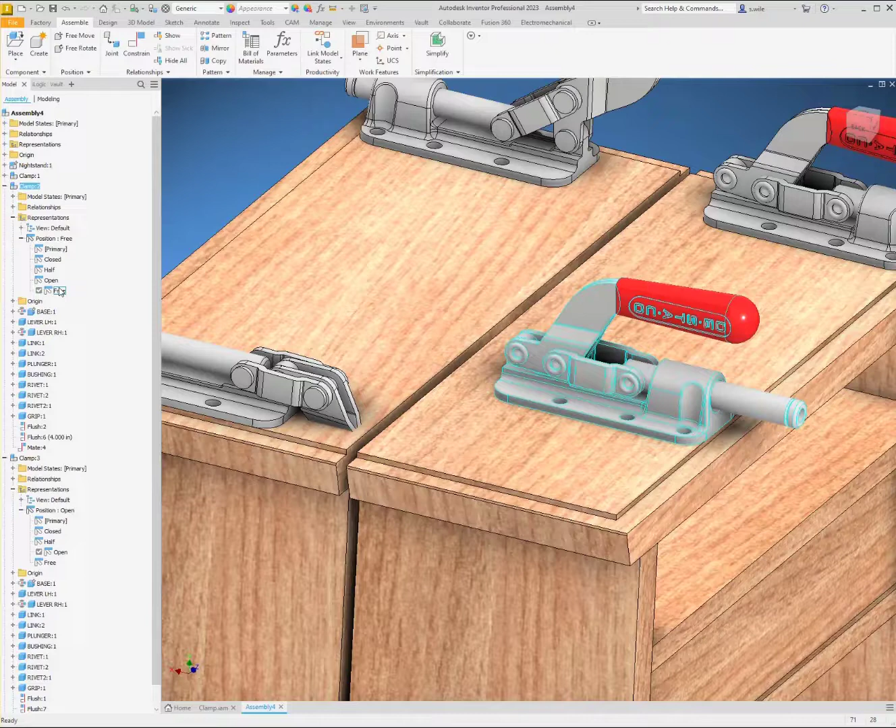So I'll make this one, I'll find it in the browser, and I'll say your positional rep is open. Oh, well, I had my contact sets all set up in order to know how far I could go, and I didn't take into account this tabletop, so we need to do some changes here. Push that over a couple inches, and we can see how much freedom we actually have by going to positions, free, and you'd think it would move because we put it in free, and the assembly is free, but an under-constrained assembly when brought in as a subassembly is always kind of grouped or rigid.

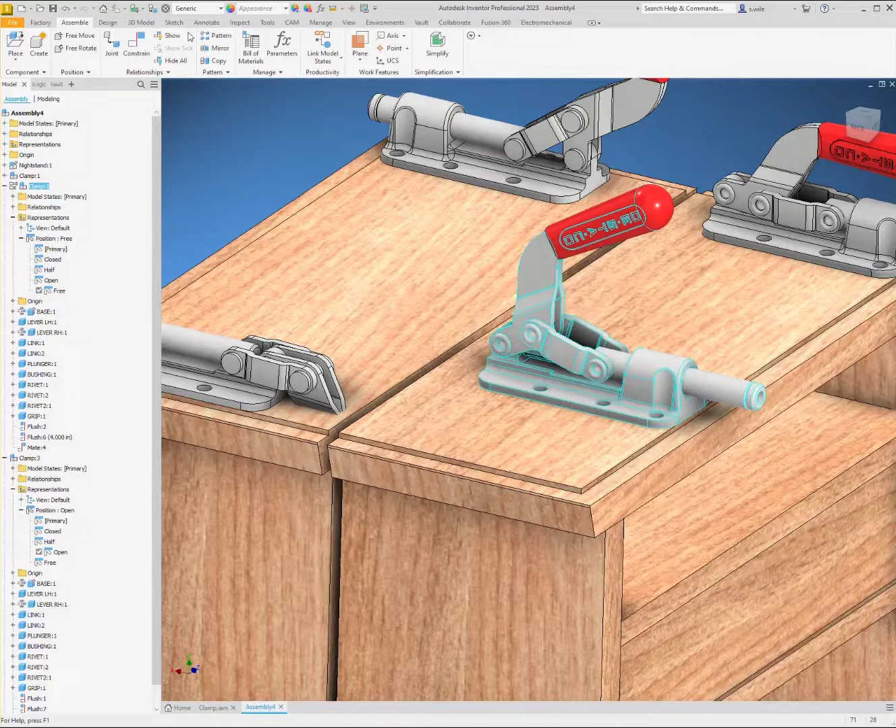But since we know there's some degrees of freedom that we want to be able to flex, we can say make this subassembly flexible. Now that the subassembly is flexible, we can freely flex this. And if I turn on my contact sets, it'll still honor those contact sets. And I can say this piece is a contact set as well. Select my cabinet and say you're also a contact set. And now it stops, and I can see my range of motion.

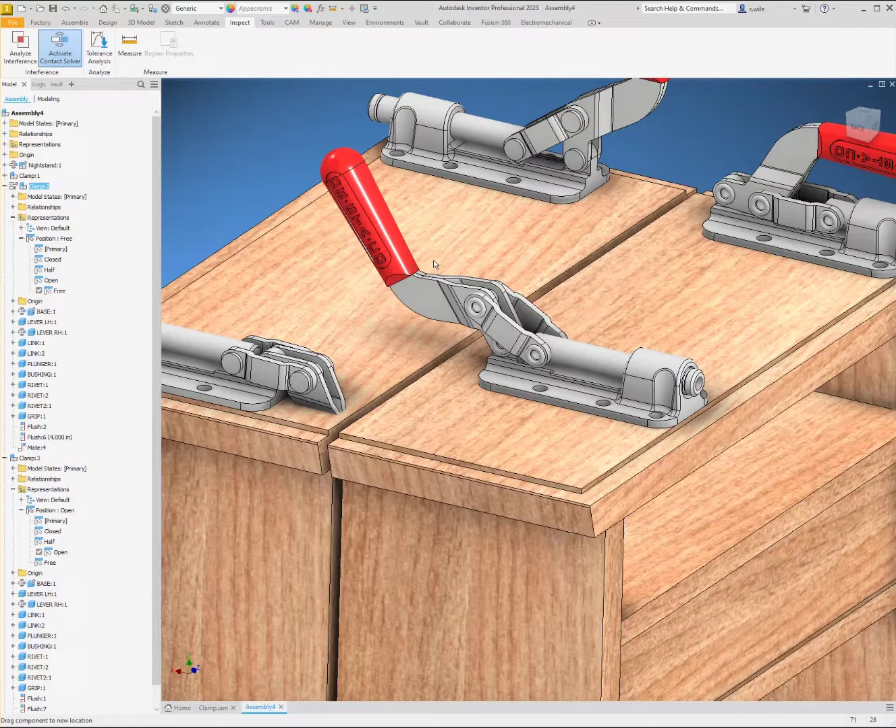So positional reps are fantastic for having multiple instances of the same subassembly inside of an assembly. You can have them in varying positions, so hinges, cylinders, anything that's going to slide or pivot, and you don't want to have people going in and changing it where it may mess up someone else's assembly.

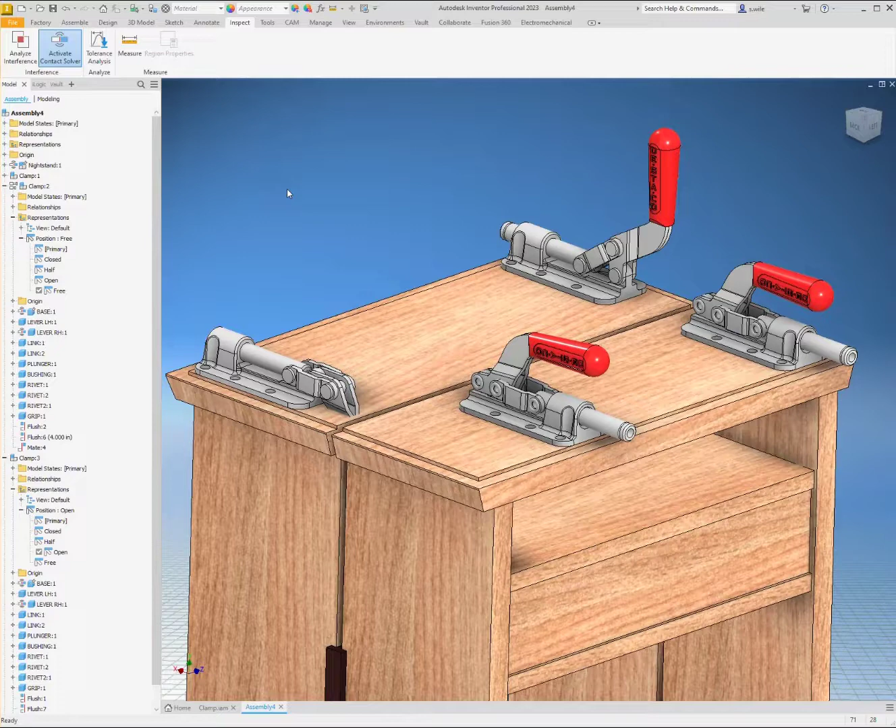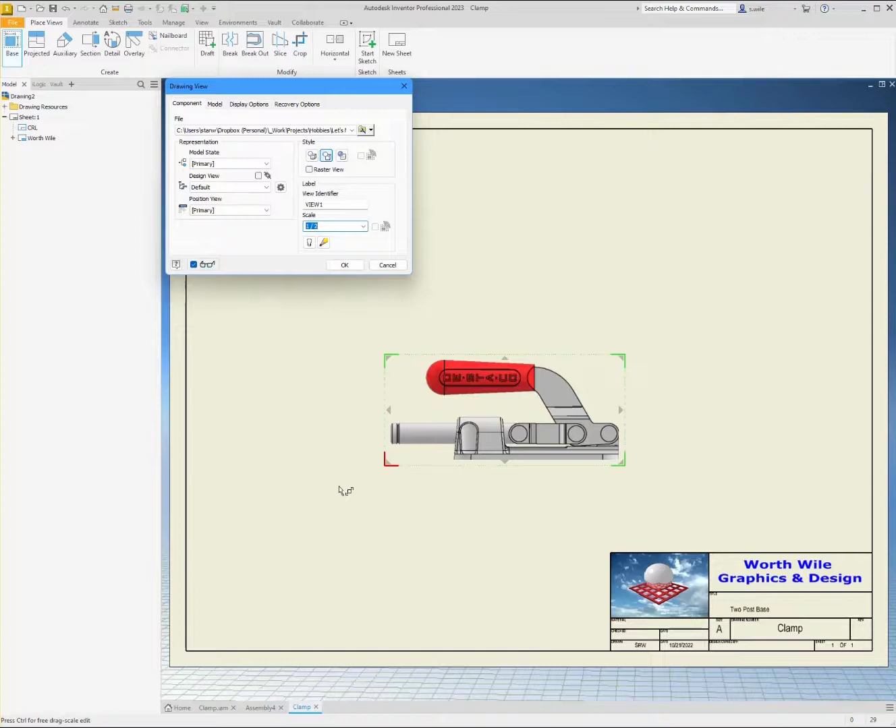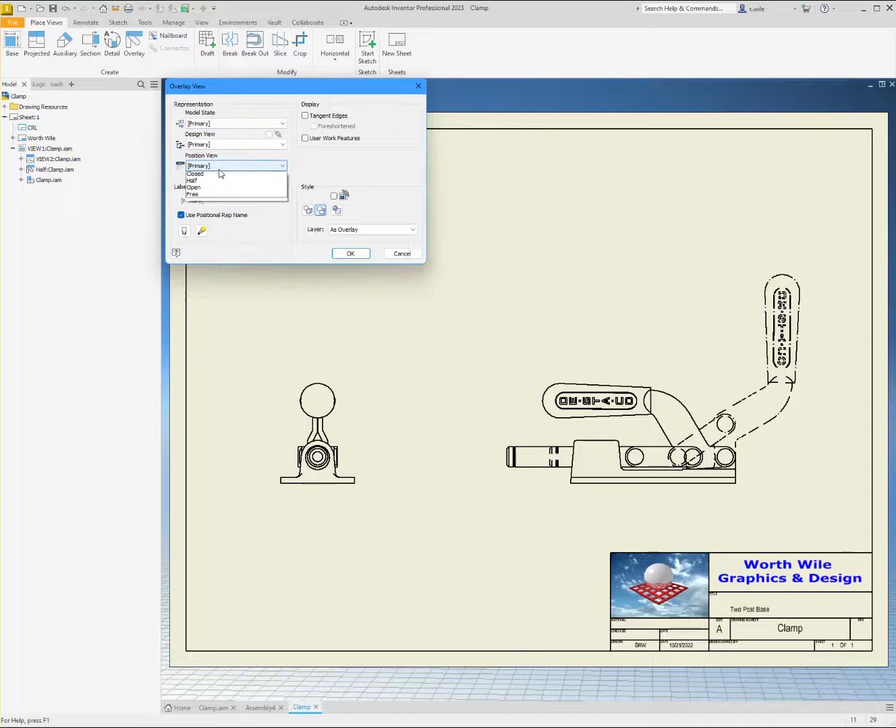If I go back and create a drawing view of this, positional reps, that's going to be too big. Positional reps can also be used in the drawing. So let's do something like this. So if I place an overlay over top of a view, I can say let's see half, and we'll do another overlay, and I want to see positional of open. And you can dimension this between the views, so you can capture what range of motion you would have. You can kind of make them behave as if they're one view. So I don't know, that's a dumb dimension, but you get where I'm going with this.

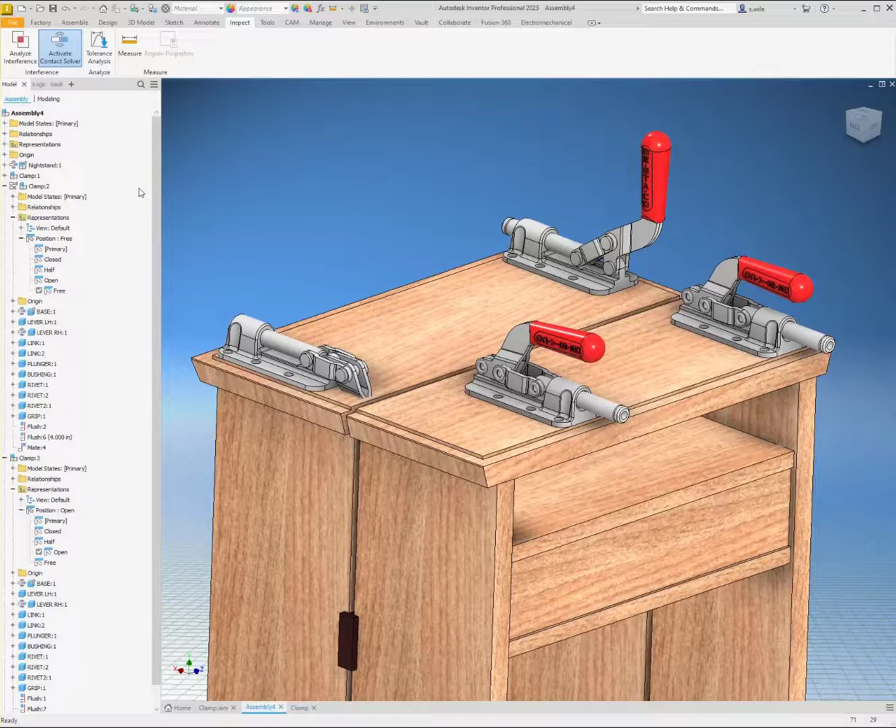So positional reps are fantastic in the drawing environment, because if you had positional reps on hinges and you use the hinges in some big assembly, in the drawing you could show the door swinging open and then draw in what that arc would be to show how much clearance you're going to need. Anything that's constrained to the hinge is going to swing when you manipulate that positional rep. Now in that case you would have to set the positional reps at the top level, right? Which I actually have some in this assembly.

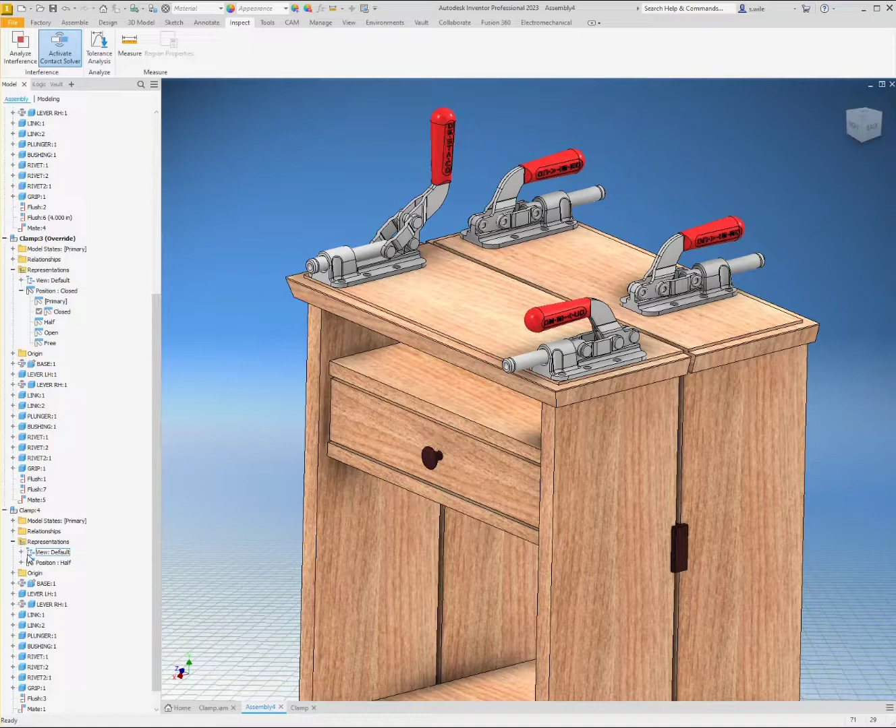So in this top level I'm going to create a new positional rep, and we'll just create a couple here. We went from assembling a clamp into positional reps pretty deep here. Didn't plan on going into this. But in this position, I can come in and switch where my clamp positions are. And my cabinet itself has some positions. I think, yep, drawer opened.

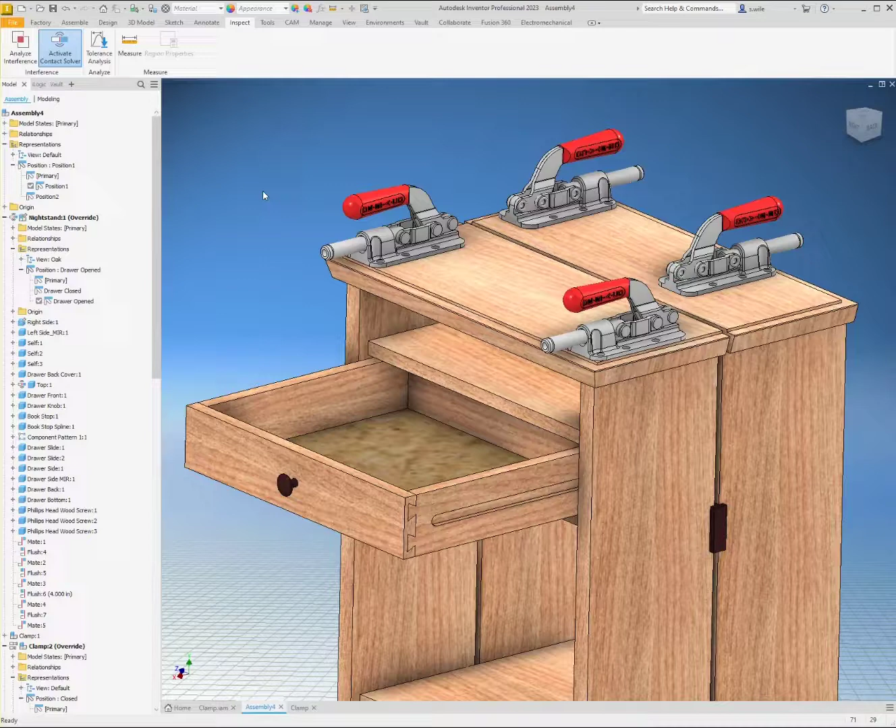So if I was to save this assembly, I could have this drawing view with the drawer opened and the clamps all closed, and then I could go to another position and then flex my hinges and my door knobs and cylinders and whatnot, and show different configurations in my top level assembly.